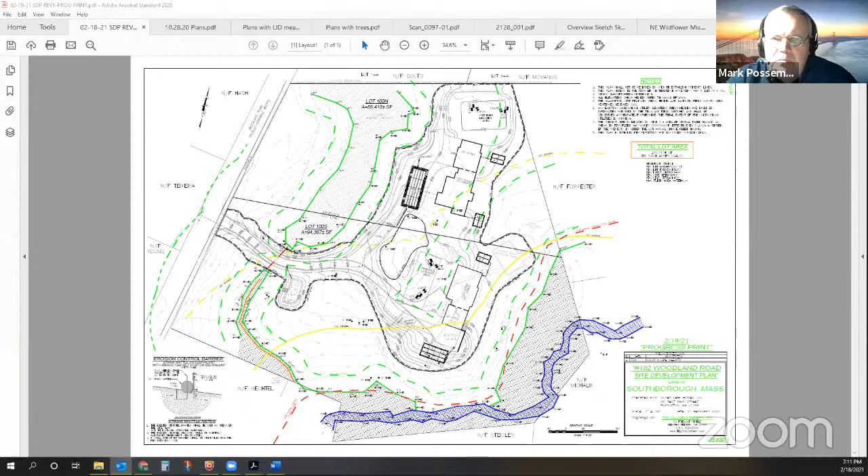Okay, thank you. At the top of the screen there are some test hole symbols, and I think it says proposed leaching area. Is that what that says? Yes.

And in front of that home box there's something rectangular in shape. Is that for stormwater? There are two stormwater recharge basins proposed. One is to the east, behind the proposed house on lot 100N. Then there's another larger recharge basin, a series of rectangles surrounded by dotted line types, that collects stormwater runoff flowing from the driveway and yard areas post-development.

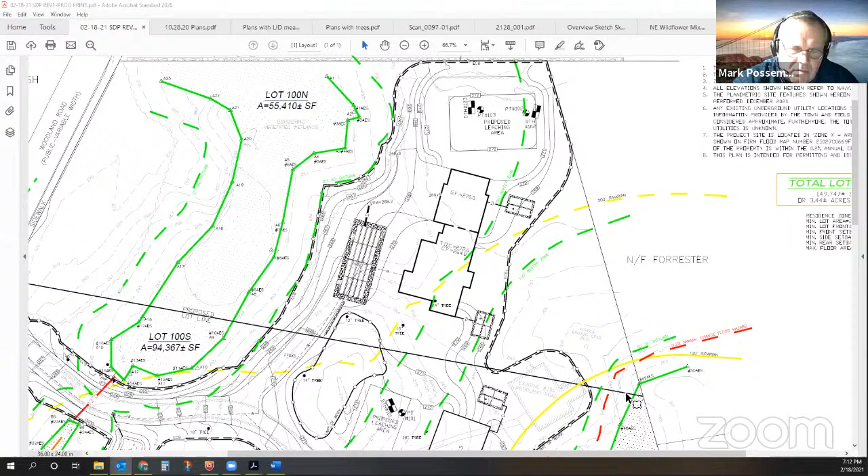Okay, and down towards the bottom left of the screen there's also some sort of stormwater feature as well. Yes, that's for the second proposed house, lot 100S for south. There are two recharge basins that serve that proposed lot. One is on the north side of the proposed house, catching a portion of the roof, and on the south side there's another recharge basin catching driveway and other portions of the proposed roof, again a series of rectangles surrounded with a dashed or dotted line type.

Okay, and for the home towards the bottom of the screen, I see that a portion of that is located in the inner riparian, the 100-foot inner riparian. That's correct, yes.

Is there any reason why you need to do that? Couldn't it be pulled out of that? It's not practical to pull it out completely. There is some wiggle room to move the house around. If you look closely at the plan, you'll see we've tried to site it and provide the infrastructure to support the house over existing developed and degraded areas on the property, and that's how we wound up with the house in that location. We're also trying to provide spacing between abutting properties and between the proposed houses.

The two proposed houses are about 60 feet apart, which exceeds the minimum lot yard setbacks, but we thought it was adequate spacing for privacy and enhancement of the property. If you look closely at the screen, underneath that southerly recharge basin there's an existing driveway and an existing garage building, which will be removed as part of the project. And those are degraded riverfront areas.

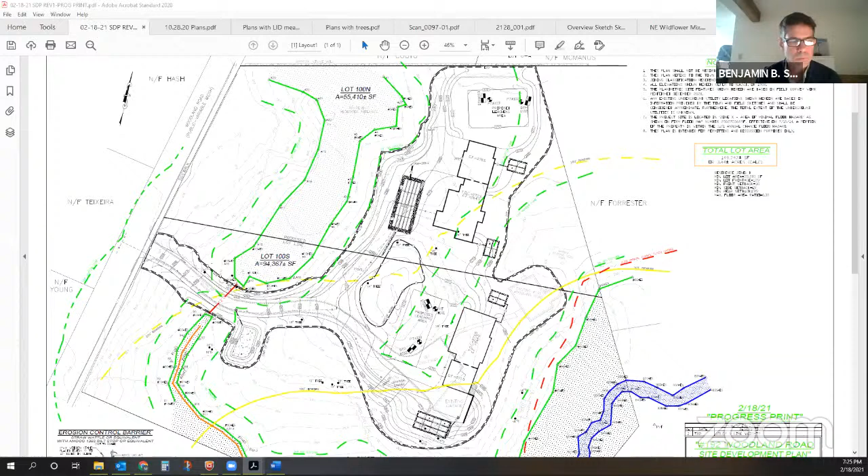Mute, Mark. Mark, you're on mute, I think you were trying to talk. Oh, thank you, I am on mute.

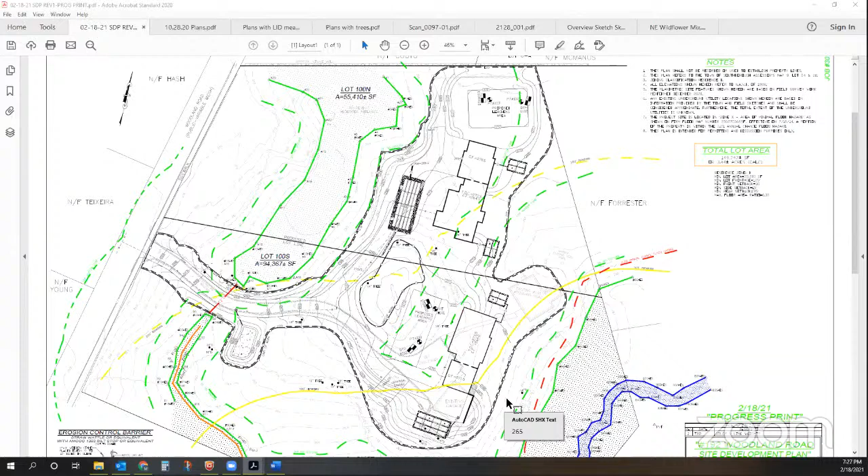And down at the lower portion of my screen, is that going to be filled in, that part of the riparian area? Yes, there's some fill proposed to get the recharge basin in.

You can see that the existing contours descend from the existing garage towards the river, and they look like they're probably 6 or 7 to 1 in slope. The recharge basin generally wants a flatter area, so I've had to play catch up a little bit with the contours to catch my 3 to 1 grade before the limit of work that's proposed.

You'll also notice that there's an approximate tree line, so this site work is being performed in an area that's already lawn, or lawn and a combination of other uses, but in general it's already in use. Right.

Just a comment on the leach field areas - I suspect this hasn't been through the Board of Health yet, right? Correct, it has not. It would be helpful, but we usually will not approve something unless the Board of Health has approved it. So if you come back again and we don't have the septic settled, we'll probably get into an obstacle. So you probably want to get that done before our next meeting if you're going to come back.

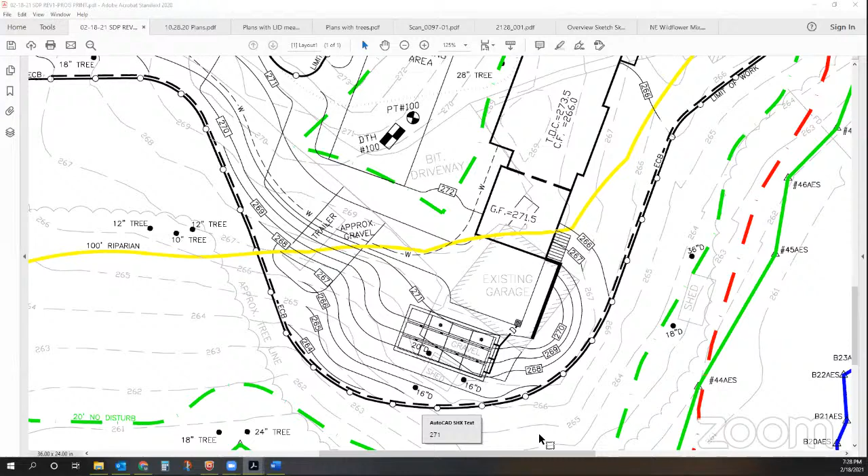Yeah, I'm pretty sure we're not going to have septic designs approved by Board of Health by the next meeting. I'm assuming your next meeting is 2 or 3 or 4 weeks away. It's in 3 weeks. Yeah, the Board of Health has been significantly backlogged on applications. We found that out in the fall.

Just to be clear, Carl, we don't - if they don't have septic approval, we don't necessarily require that for our approval. No. Should Board of Health require a change, then they would have to come back in front of us with an amendment, and we would have to consider the amendment at that point in time. Okay.

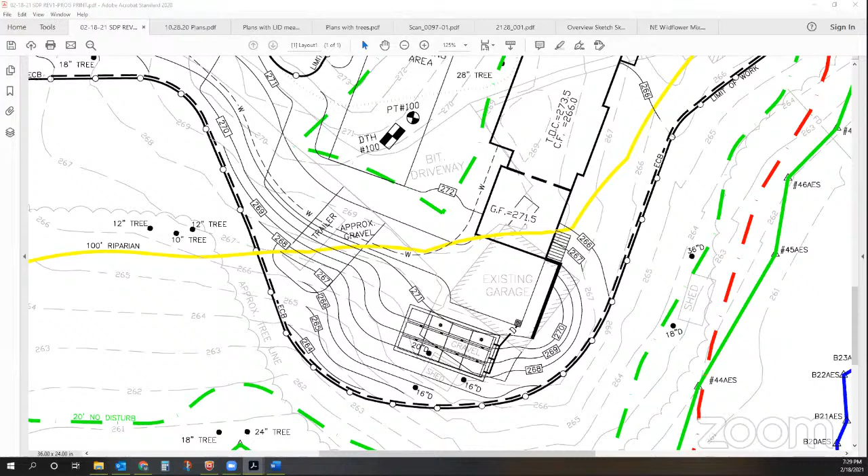Just for clarity, I can also add a little bit to that - in preparing this site grading plan, we've been conservative with all our design sizing requirements on the septic system. So it was the intent that it's probably larger than it needs to be, anticipating that we might be able to make it slightly smaller. So if we come back to conservation with a change, it would be considered insignificant.

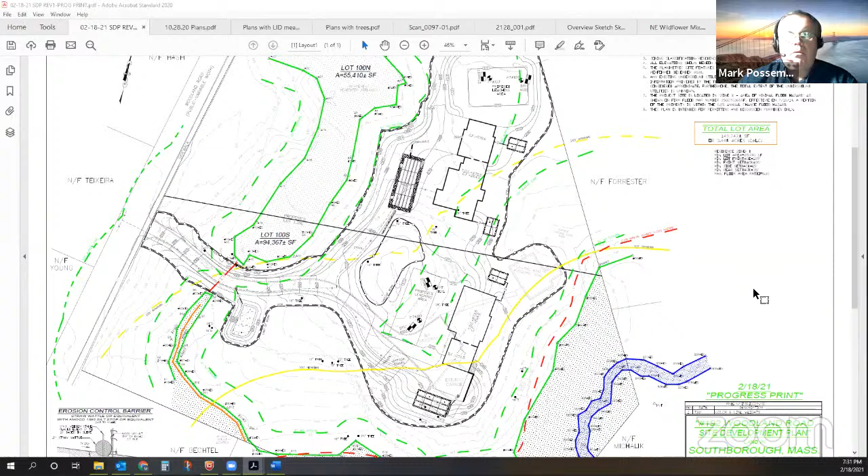Okay, any other comments, questions from commission members? Just a minor clarification on Mr. Geyer's question. For the regrading south of the driveway in that 100-foot riparian area, is the plan to remove the trees behind that tree line, or is all the work outside of the tree line?

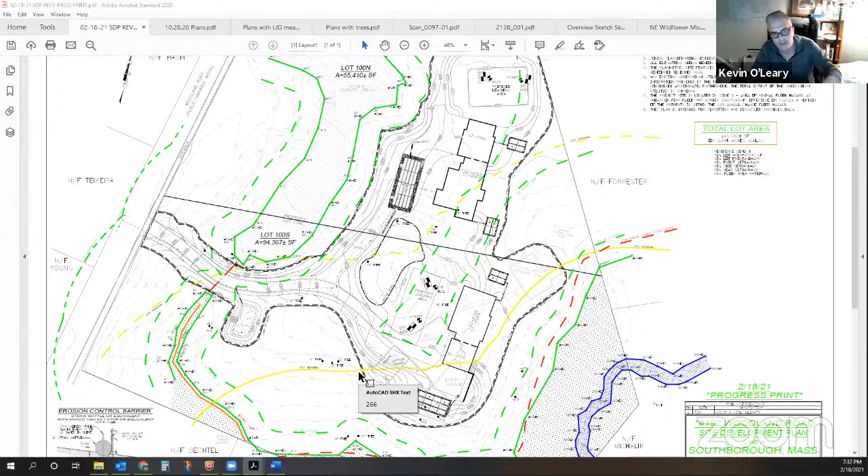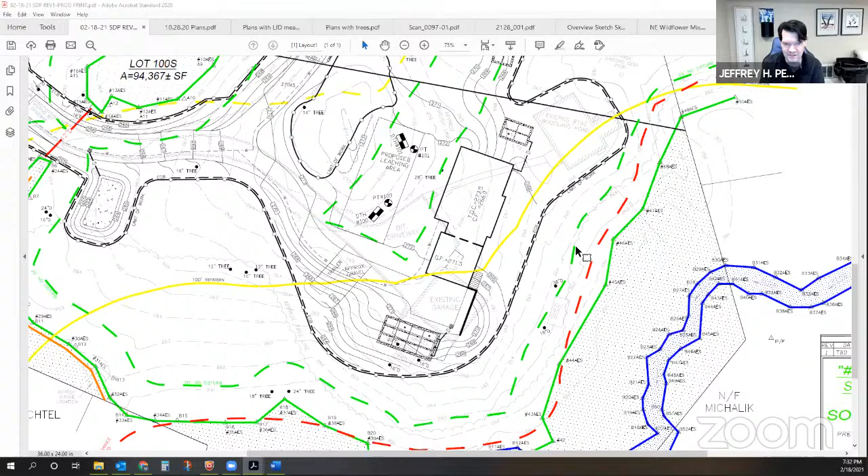The work is generally outside the tree line that's delineated beyond the limit of work. Everything within that limit of work as plotted will be altered, but outside of that is not to be touched - this existing tree line as best we could estimate it during the survey. Okay, that's what I thought, but I thought I heard different in your response to Mr. Geyer. So there would be no trees removed that are outside the limit of work, right? Right. Okay, thank you. You're welcome.

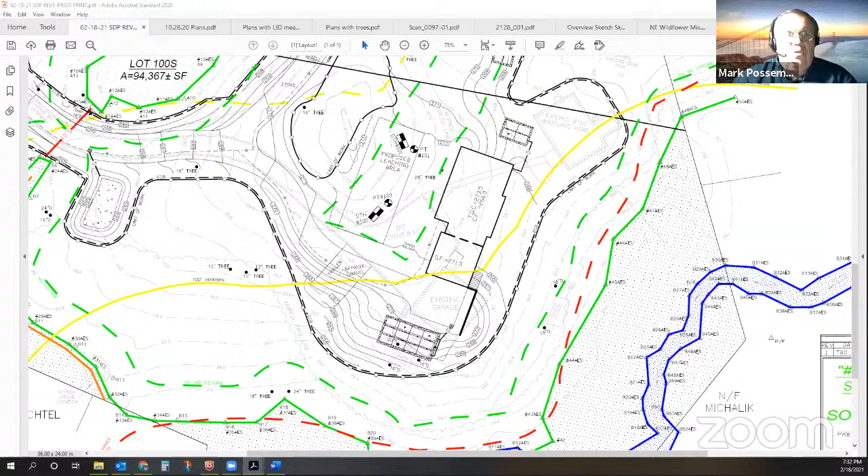Okay, if there's no other comments from commission members, I'll open it up to the public for any comments or questions. Please use the raise hand feature, it should be in the bottom of your screen. And I do not see any as of right now.

Nothing. Okay, all right, so we're continuing this until the next hearing, I assume. I looked to the applicant to see if 3 weeks is appropriate or if they need more. We'll try to make it work. I think it should be adequate.

I did have one question on Kevin's behalf. Is it appropriate for Kevin to reach out directly with your wetlands consultant to resolve any outstanding issues? Yeah, just copy me on any emails. Okay, so I'm kept informed, and then you're all set.

Yep, okay. And I guess if the weather doesn't break and we're unable to get out there to review the wetland line, then it will probably make sense to continue it beyond the next meeting so that can occur, because that'll be key to moving this forward.

All right, do I hear a motion to continue this hearing to, what's the next date, Melissa? March 11th. So moved? I hear a second. Second. Okay, all in favor by roll call vote?

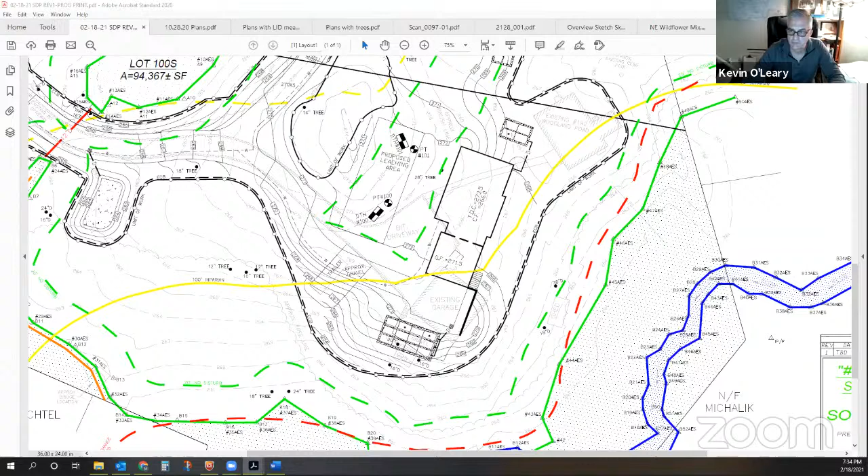Thank you very much. All right, yep, thank you. Yep, you're welcome. Have a good night. You too.

Okay, next up is the notice of intent, 5 Nathan Stone Lane, map 10, lot 100, expansion of lawn into the buffer zone. In accordance with the provisions of the Southborough Wetland Stormwater and Erosion Control Bylaws, Southborough Zoning Code Chapter 174 Section 13.5, Wetlands Protection Act Mass General Laws Chapter 131 Section 40, the Southborough Wetlands Bylaw, the Southborough Conservation Commission will hold public hearings on Thursday, February 18, 2021 at 7 p.m.

Via virtual Zoom meeting on the petition of, excuse me, for the demolition of existing buildings and construction of - well, that's the same thing. So this is, pardon me a minute. I think we have a cut and paste issue here, Melissa. Okay. Do you want, I can read it if you'd like. This is not Silverleaf Homes, correct? Correct.

This is, if it ever loads - notice of intent for 5 Nathan Stone Lane for the applicant Nick Antonopoulos, I apologize, I butchered that. The project description is expansion of the lawn into the buffer zone. Thank you. Sorry, Mark. Okay.

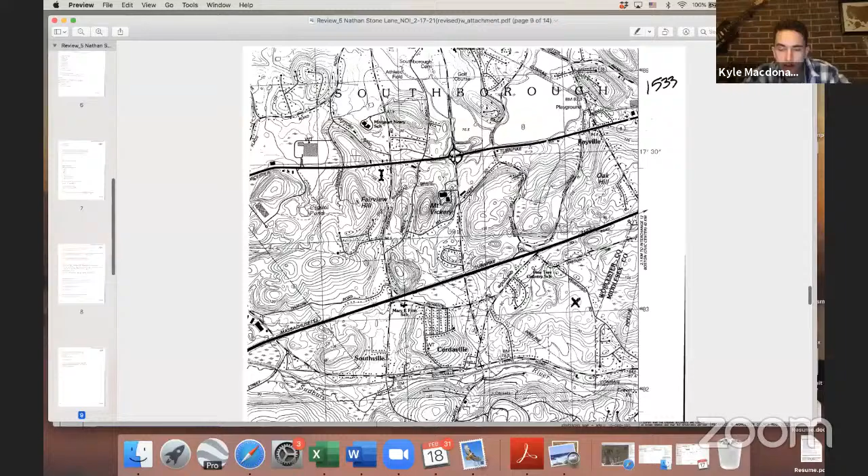I guess I'd like to take the opportunity to respond about the vernal pool a little bit. So one of the attachments to Matt's letter showed the map - let's see if I can find it. This was an attachment from the certification of the vernal pool. So this is our lot here, and this is what they've shown as the vernal pool. As he said, it's just kind of a hand sketch, probably not to the level of accuracy we could put together today. But I did look at it, and this is by no means technical or official, but if that property line is 157 feet, just visually looking at it, that certified vernal pool looks to be at least 200 feet away from the property.

So I do understand that. I looked at the aerial as well, and there are some other areas of ponded water you can see via the aerial. But I guess I would assume during the certification process for this vernal pool that the area was generally looked at. And I believe that replication area, assuming it was built around the time of the subdivision, would have been between 1994 and 1995, and the vernal pool study would have been later in '98. So my assumption would be that there would be no additional vernal pool habitat in the area if a study were to be done.

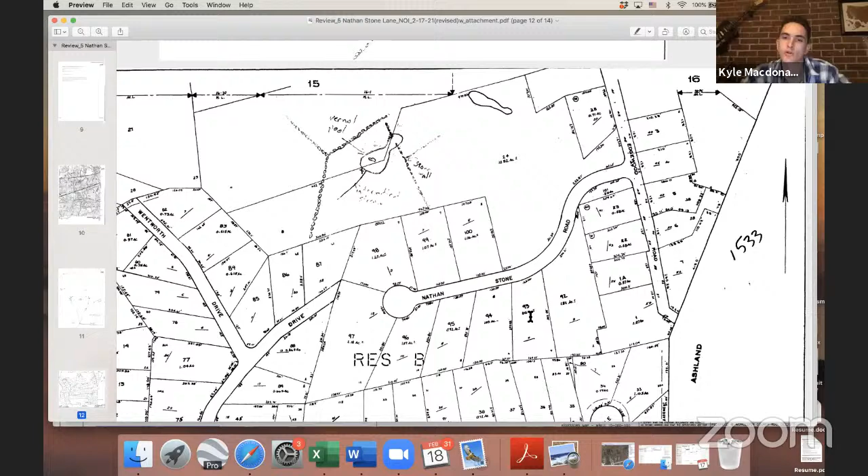And my last comment would be that, to my knowledge, the bylaw nor the Wetland Protection Act provide additional protection to vernal pools rather than just bordering vegetated wetland. And if I go back to the plan here, we're respecting the 20-foot no-disturb buffer in all locations. So my thought would be, even if there were additional vernal pools in here, what regulations would limit the amount of lawn we'd be able to have in that area, considering they're not necessarily treated differently than just a traditional wetland under the local bylaw.

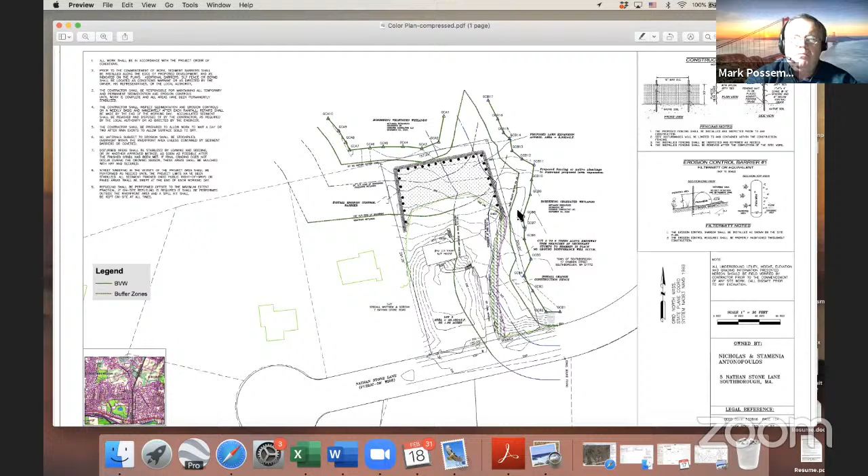Is that a question? I guess it's partially a question, partially just me getting my thoughts out there. If it's something the commission requests, we could get out there in late March, early April and determine if there are any other vernal pools out there. I guess the question would be what ramifications would that introduce to the project. Say there is a vernal pool right here, considering we are already respecting the 20-foot no-disturb. I guess the question would be what further restrictions would be placed on the lot.

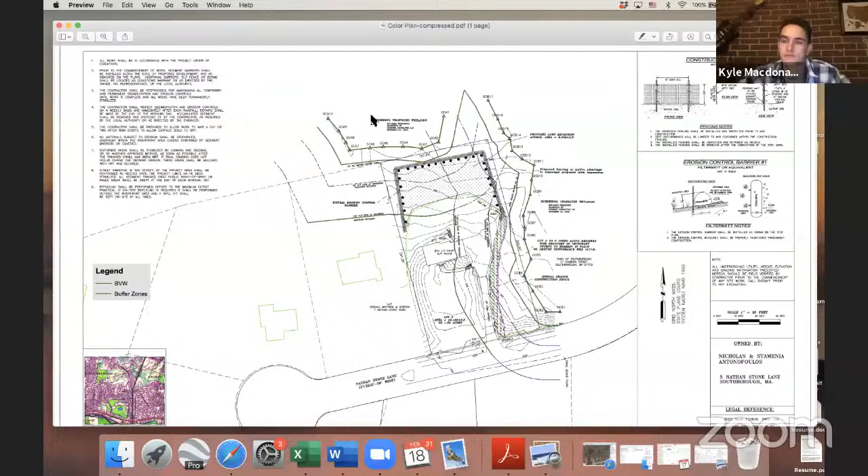The first step we have is we need to get out there and take a look at the wetland boundary and see where it is. Given the snow cover we've got, we need some of that to recede to open up the ground so it can be reviewed. So that's what's immediately in front of us.

Understood. So to that end, I'll open this up to anybody from the public that wants to comment or question. Are there any hands raised, Melissa? I do not see any hands raised. If you would like to comment, please use the raise hand feature in the lower portion of your screen.

I do not see any. Okay, all right, so we'll go ahead and continue this to the next hearing and hope the snow has some melting between now and then, and we're able to get out there and take a look at it. Do I hear a motion to continue to the next meeting, which is March 11th?

So moved. All right, is there a second? Second? Okay, all in favor by roll call vote? Watson, yes. Smith, yes. Pete, yes. Guyer, yes. Gregory, yes. Possemato, yes. All right, thank you. Thank you.

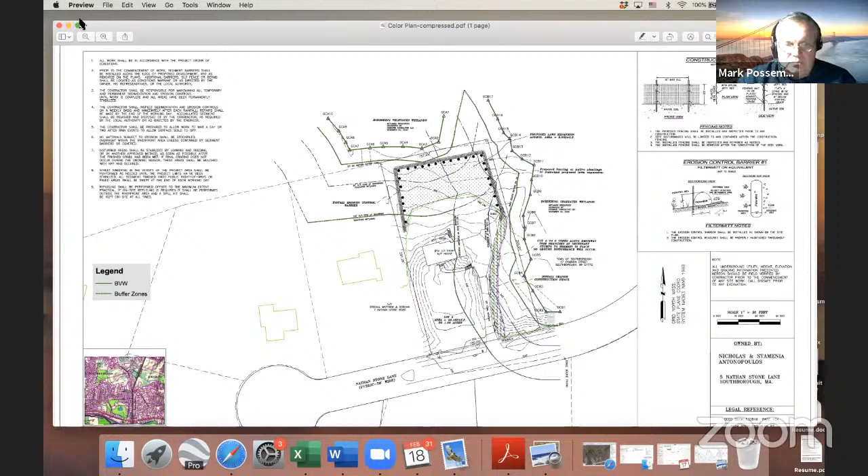Okay, next up, 730 Ruby Estates, NOI and SMP. In accordance with the Wetlands Protection Act, Mass General Laws Chapter 131 Section 40, Southborough Wetlands Bylaw and Southborough Stormwater Erosion Control Bylaw, the Southborough Conservation Commission will conduct continued public hearings on Thursday, February 18th, 2021 at 7:30 p.m. via virtual Zoom meeting. The commission will consider notice of intents and a stormwater management permit for a project located at 96 Mount Vickery Road, to be known as Ruby Estates, map 28, lot 18, for the applicant Bartolini Properties. The project description is construction of a roadway and associated stormwater features for a 6-lot residential subdivision. These public hearings are being held concurrently.

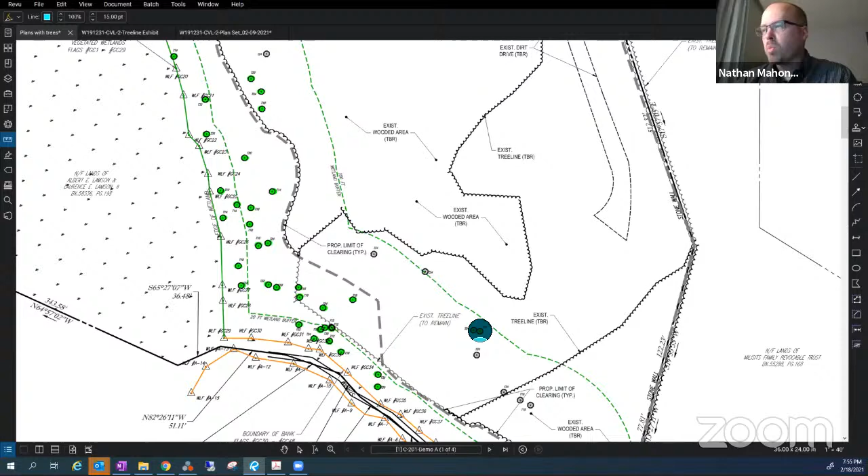Relative to the disturbance within the 100-foot buffer zone, the houses on each lot have been pushed up to the front yard setback required under zoning, so all the homes have been pushed as close to the street as possible. Lots 1, 2, and 3, the first three on the plan here,

have had 10-foot foundations, non-standard foundations, implemented into the design in order to reduce the fill required for those three lots, as well as to pull in the grading on the back of the lots and reduce the amount of disturbance within the buffer zone.

Lots 4 and 5 have also been pulled back to reduce the amount of disturbance in the buffer zone in the lower area. Lot 5 was a little more restricted, obviously, because that's where the stormwater basin is located. The changes provide the maximum amount of retained buffer zone while trying to maintain a usable yard and a usable product for each lot and the future homeowners.

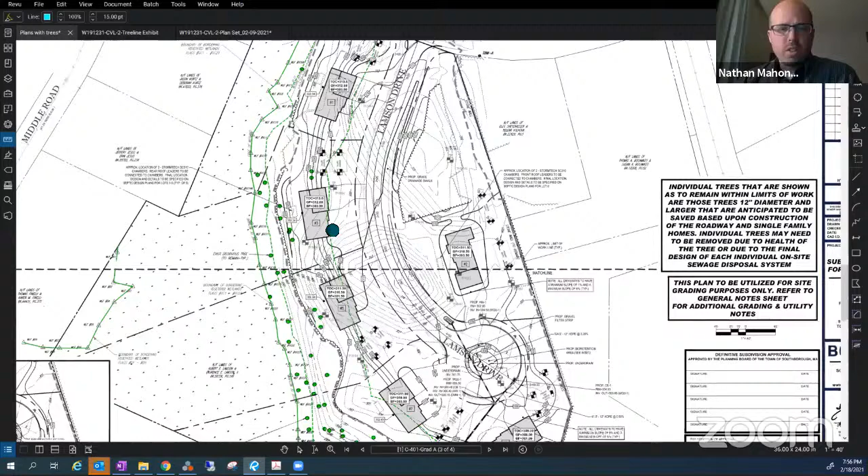All in all, the changes reduce the buffer zone impact by around 10,000 square feet, and we're currently leaving about 41% of the buffer zone in its current state. This is an increase from the 32% presented at the last meeting.

The project has also incorporated some LID techniques that resulted from the planning board process and planning board comments. I can run through any of them in detail, or answer questions, but in general they include a roadside swale in lieu of curbing to direct stormwater from the roadway down to

the infiltration basin. There's a bioretention area that's been added to the center of the cul-de-sac to provide additional vegetative treatment of runoff as well as to reduce impervious cover.

And each of the lots has incorporated underground storm tech chambers to capture the rooftop runoff from approximately half of the roof area for the 1-inch storm event, and put that in the ground to provide more decentralized infiltration throughout the site. The stormwater calcs submitted account for all of these,

and an updated operation and maintenance plan has been provided that reflects these new features. So those are fully accounted for in the operation and maintenance plan.

Lastly, relative to plan changes, there were some specific comments from the commission members at the last meeting relative to the location of the sediment basin and how and where that was going to be sited. Those have been addressed, so they're relocated outside the footprint of the infiltration basin at

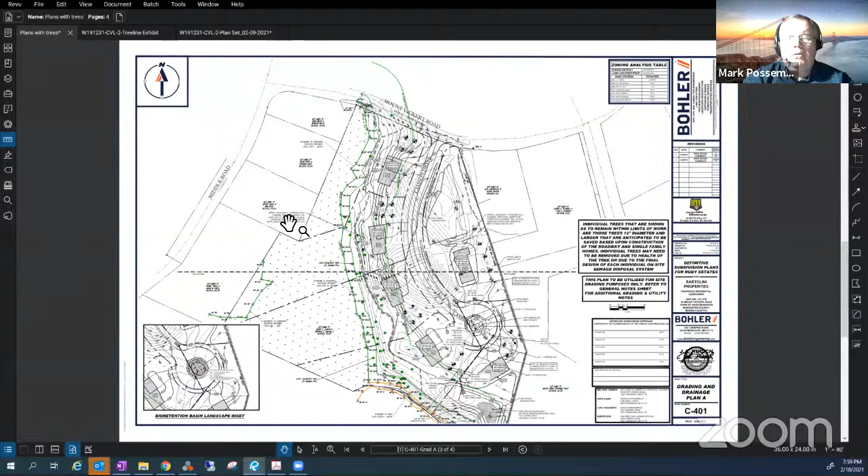All right, thank you. Mr. Farrell from Lucas Environmental, you have any commentary here?

Yeah, just a few things. I was able to take a look through the plans. I did visit the site this morning just to take a look at the tree survey and some of the other portions of the site, best I could with the snow out there, but the wetland boundary was all previously approved.

I think the tree survey, as far as showing the hardwood trees, was fine. I just want to bring to the commission's attention that there are numerous other trees out there, primarily pines and some firs. I want to make sure the commission doesn't look at this plan, see the little green and gray dots, and think those are the only trees out there. As we discussed at the last meeting, the trees likely to be of any value for preservation are going to be the hardwoods.

The pines that are out there are fairly significant. A lot of them are at least 18 to potentially 24 inches in diameter. So there's some good size trees out there through the buffer zone as well, but understanding that when you start thinning out the forest, the pines are unlikely to survive long term. I just wanted to point that out.

A couple other comments on the response from Bohler. One question I had, on the drainage, with the improvements you've made with the low impact design, the infiltration for the individual homes and the basin within the cul-de-sac - I know you didn't include that in the calculations with any intention of reducing the size of the main basin at the southern portion of the site. But my question is, is it to the point now where you feel it's over-designed at all, where that basin could be smaller, just thinking about further reducing impacts within the buffer zone?

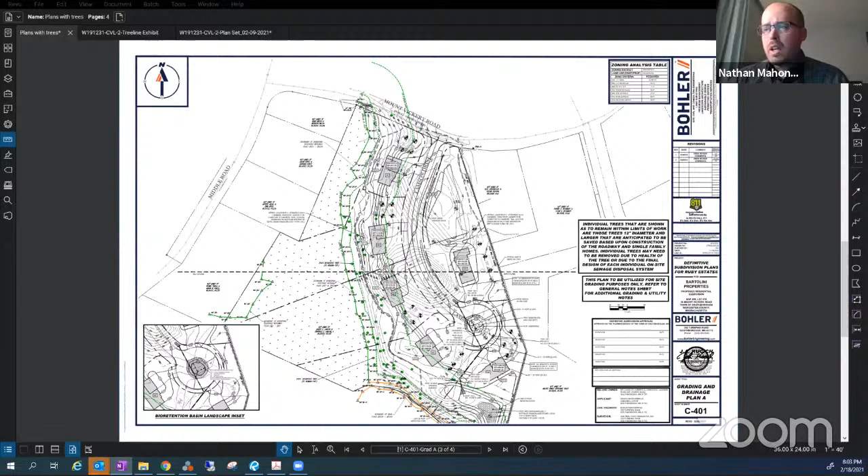Relative to the pines, bear with me a moment. We actually did locate the pines as well. I know the focus at the last meeting was the deciduous type of trees, the legacy ones with the shade and so forth. The discussion was that individual conifers have a hard time really surviving after it's thinned out, because of the type of root system - it's shallow, spreads out like a plate, so they're subject to blowdown if you don't have a good group of pines or conifers in one area. But we did locate the conifers just so the applicant had them.

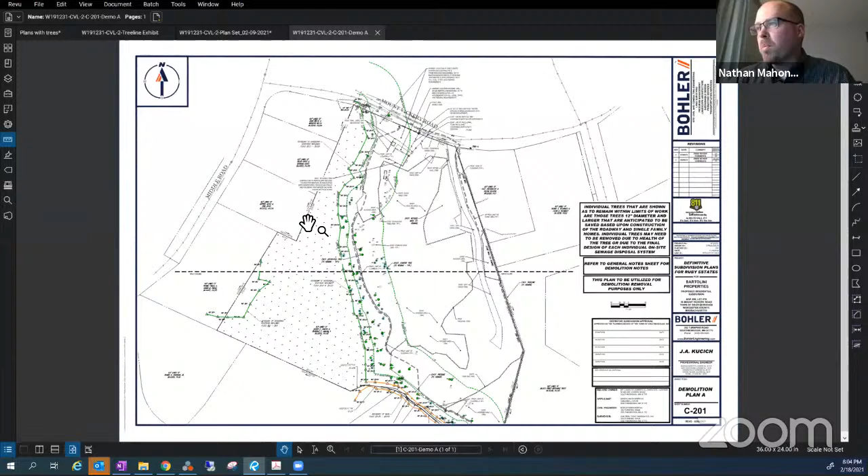This here is an updated version of the buffer zone plan that I just showed. The deciduous trees are still shown in green. The conifers have been added in blue. The conifers to be removed are the same symbol, but just grayed out in this area.

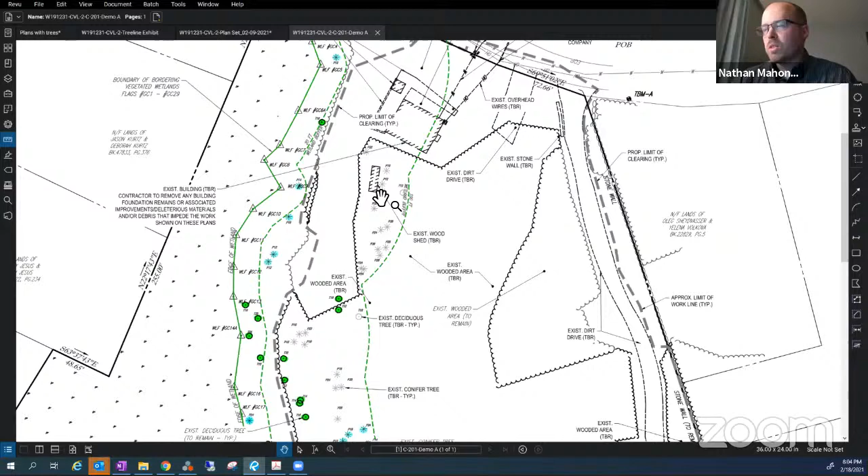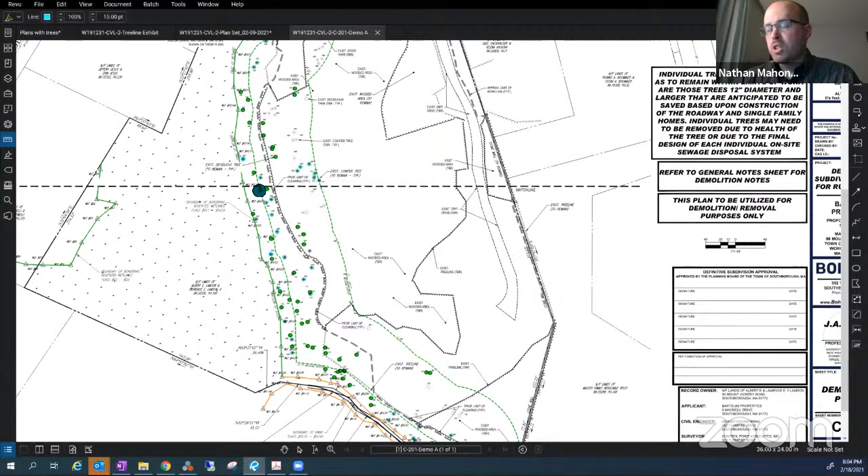Relative to what's in the buffer zone, the trees are really spread out for the most part. There's a section near the existing shed, and another section in between lots 2 and 3. The remaining 12-inch diameter and larger trees are closer to the wetland, between the 20-foot buffer and the exterior limit of work. Looking at all trees in total, both coniferous and deciduous, we're saving approximately 109 out of 151 trees, about 72% of the total trees 12-inch in diameter within the buffer zone.

The main focus at the last meeting was just discussion of the deciduous trees, but while we were out there, we felt it pertinent to get the coniferous as well, and evaluate those to make sure we were taking them into account on the design.

Okay, thanks, Nathan. You're welcome.

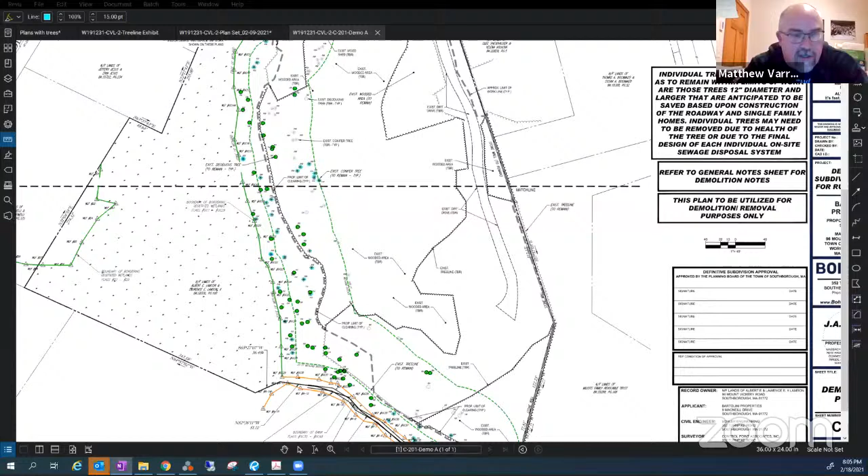Couple other questions. Can you bring up the grading plan again? There were a couple spots. I think one was behind lot 4 where there seemed to be some grading shown that maybe was unnecessary. Zoom in on 4, there was a proposed grade line. Sorry, I guess it's number 5 maybe. 5 is the basin, 4 is here, go up the next one. Yeah, see that grade line right at the erosion control proposed area. I wasn't sure what that was about, seemed kind of random.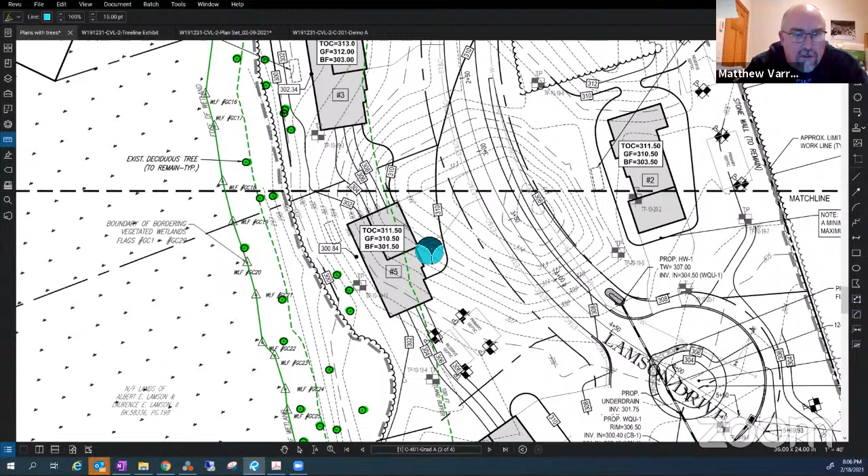So the house elevation, when you come down to the back for a walkout, the back elevation is around 301. This is just to catch up to existing grade—we're right at 300 there. That's really just to provide positive pitch away from the foundation. It's the minimum distance we need to get away from the house box before we're at existing grade and able to pitch water away from the foundation.

So where we have those 3 trees there, presumably the goal is to preserve those. Correct—that will potentially take some careful grading in that area to make sure those trees are preserved. They're about elevation 301, which is again about the back of the building, so we'd be grading down probably 6 inches or less in those areas. But as it's being fine graded, they'll have to take some care working around the base of those trees. The plans do call out for tree protection fencing around the trees to remain, so they can be protected and maintained during construction.

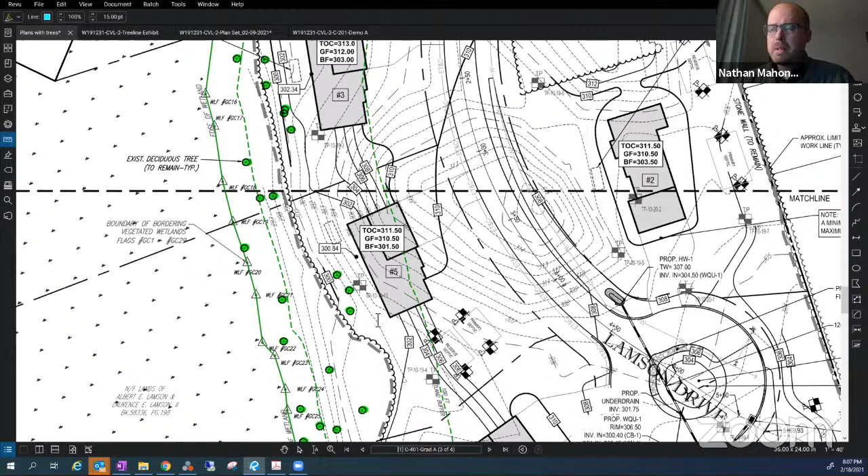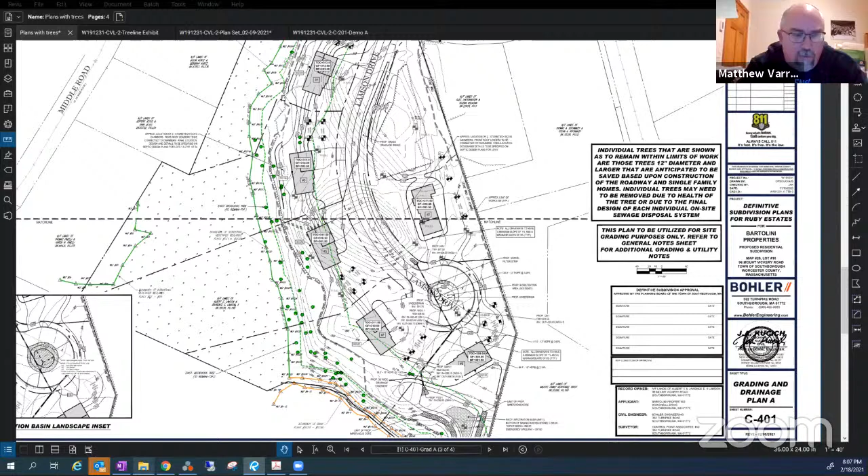And then the only other question I had was about using the conservation wildlife seed mix—I couldn't see in the plan if there was a landscape plan that showed exactly where that seed mix would be used. There was a separate exhibit submitted with it, I'll pop that up here as well. Again, it's on the outside of the site.

Shown on this plan here, this is the grading plan with the wildlife seed mix shown in green. The areas where we're tighter on the back of the yards now, because of the reduced fill and reduced slopes, and we're providing an additional preserved buffer beyond the 20-foot we originally targeted, will be regular lawn and landscape up to the tree line. The areas in green near the front and back of the site are disturbed areas between the basin and the tree line, and other adjacent areas where there was some existing disturbance, where we felt we could seed it and provide additional enhancement to that maintained buffer zone.

And the same thing up front here—this is all existing area currently used under the former home and so forth, that could use some additional seeding in that area, letting it establish and come back to more of a natural wildlife type of state within the buffer zone. So those were really the 2 areas we targeted—around 11,000 square feet of total buffer zone that we'd be looking at seeding with that mix.

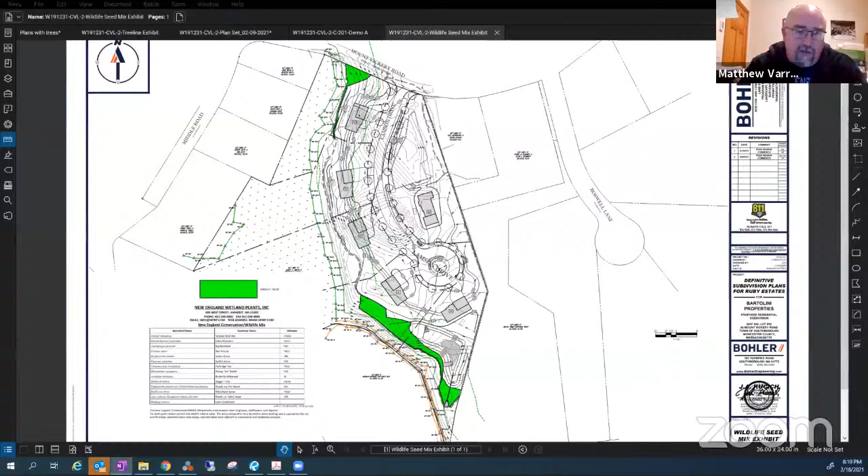So then I guess my last comment, this would be more for the commission, or I guess for you, Nathan. I don't know if you're proposing any sort of signage, or just throwing it out there for the commission to consider. I applaud the applicant, I think this is a much better plan than we last saw. But with everything at a less steep slope now, which is good, I think it potentially lends itself more to lawn creep. So there may be a need for signage or something to delineate where that permanent limit of work is, so future homeowners understand their lawn is what it is and not to be expanded closer to the wetland. That was all I had.

All right, thanks, Matt. Any other questions, comments from conservation members?

Yes, Mr. Smith. Yeah, first, as Matt said, I just want to acknowledge that clearly the applicant listened to our comments and took it seriously. In particular, the changes pulling the houses further away from the wetland and making the foundation changes to lessen the grading impact behind the houses, I think is a great change to the plans. I'm really glad to see it.

The only question I had was regarding the rooftop infiltration, and this is just a technical question. Are you proposing 2 of the StormTech chambers for each rooftop? There are 2 of them called out in the remaining 4. I just want to make sure, is that the setup?

Yeah, it's the same size system per lot. So each lot will have that 2-chamber system. Okay.

I see in the call out the details of those you're anticipating to provide on the septic plans. Correct. Each house lot's going to need its own detailed septic design plans showing the grading of the lot, the home, and obviously all the septic components. Those systems would be detailed out on there with cross-sectional details of the underground system as well as elevations of the systems themselves.

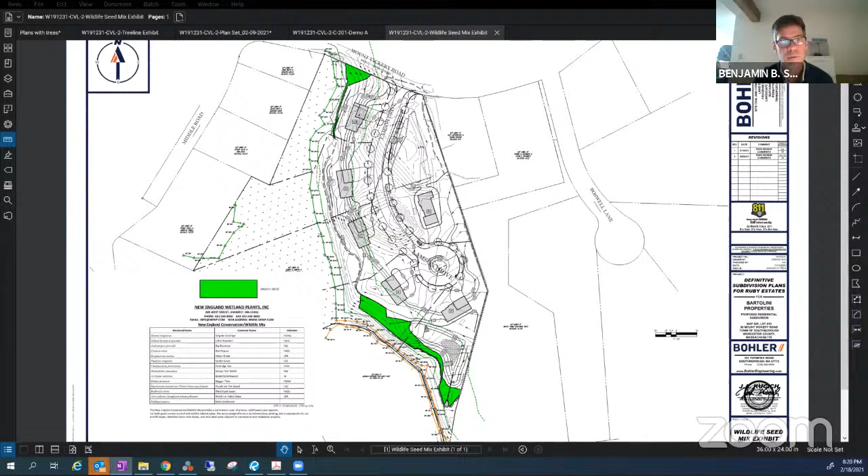I'm looking for other recommendations from the commission with respect to this project. I'm fine with what you proposed. I think we can talk through the conditions and whatever we're adding to the standard conditions, and that would give us enough information to make a vote on it and give Melissa what she needs to get it typed up for our signature. We would all have to just pop in to sign before the next meeting, but we've done that before.

You don't even need to sign them. We have electronic signatures, we passed that. That's right, forgot all about it. Virtual, never have to see you again signature. Yep. So yeah, it's not the signature that's the problem, it's just the 21 days of physically getting it to them. If Melissa's good with it, I'm good with it.

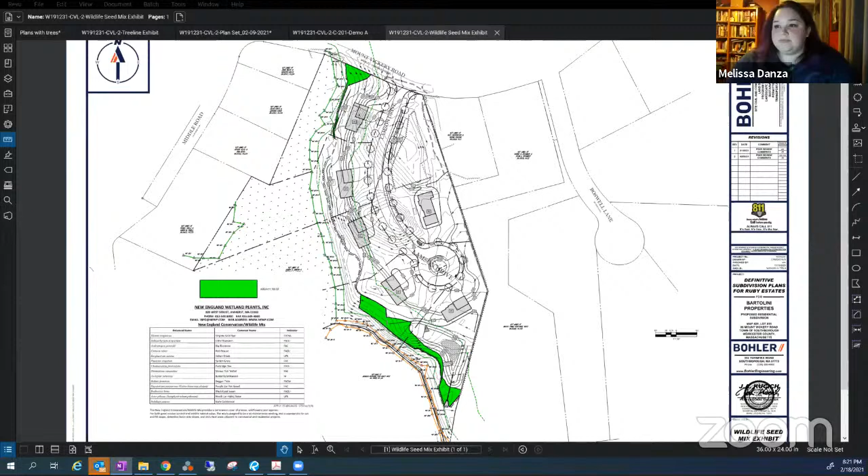Okay, so do I hear a motion to close, which one should we do first, Melissa? The stormwater or the NOI? It really doesn't matter. Okay, do I hear a motion to close the stormwater management permit hearing? So moved. Is there a second? Second. All in favor via roll call vote? Watson, yes. Smith, yes. Pete, yes. Guyer, yes. Gregory, yes. Passamano, yes.

Do I hear a motion to close the notice of intent? There are 6 of them, numbered 290-1067 through 1072.

I didn't have that in my notes. So do I hear a motion to close the NOIs for the 6 lots that Melissa just mentioned? So moved. Is there a second? Second. Okay, do I hear a vote by roll call vote?

Watson, yes. Smith, yes. Pete, yes. Guyer, yes. Gregory, yes. Passamano, yes.

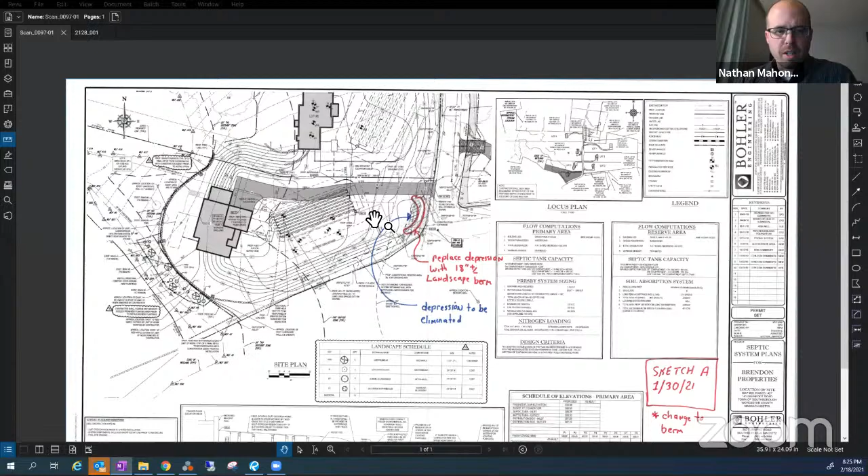So in the spirit of what was really approved under the original plans, the homeowner is going to extend the berm a little further towards the driveway to build up this area and allow it to hold back, detain, and infiltrate any water running down to that low area, in lieu of putting in the depression. From an engineering standpoint, viewing it on site and the way water runs in this area now, we feel it's going to act as a replacement for that infiltration area.

It's noted that since this vegetation's been put in and the lawn's been seeded, the vegetation is doing a great job of taking up that water into the ground and into the root system. The intent would be to extend this berm, and it would be reflected on the as-built plan for the certificate of compliance, noted and discussed in that request for documentation.

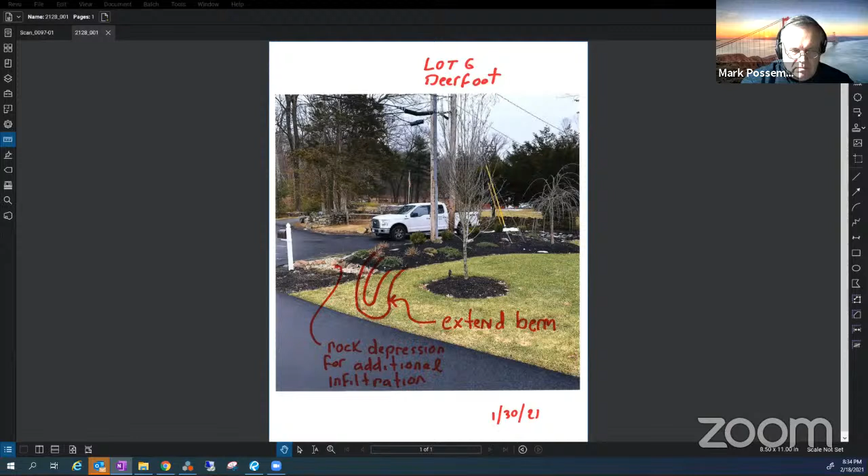All right, so I'd be looking for a motion to approve this proposed extended berm. So moved. Is there a second? Second. Okay, all in favor via roll call vote? Then, Yes. Smith, Yes. Pete, Yes. Guyer, Yes. Gregory, Yes. Possemato, Yes. All right, thank you.

All right, thank you for your time.

Okay, the discussion on the invasive mitigation at 6 Newton Street has been continued, so we will not be talking about that this evening.

Next item was 84 Main Street, update from the owner and discussion of status. Yes, let me move in. I see both John Delli and Peter. So the commission asked them to give an update on some of the things they had been seeing and follow up on some past violations and issues. They agreed to come to this meeting to provide that update and have some rough sketches to show the commission. Okay.

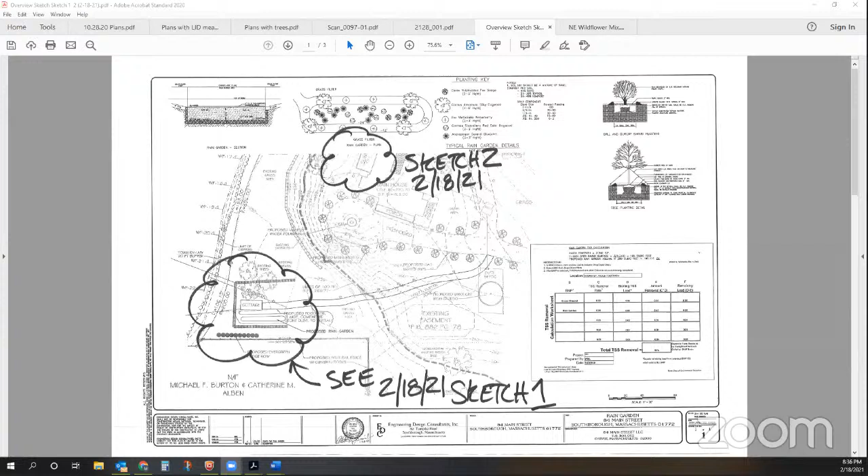It's Peter Bemis here. John, I think you're probably on mute, but I know John's here as well, and I did email Melissa a couple of sketches just so there was at least a talking point for this. Do you mind bringing those up, Melissa? Peter, you might want to adjust your camera down a little bit, we can just see your eyes and forehead. I'm sorry, there you go, thank you, I wasn't looking at what I look like. Put your camera back to where it was, only kidding. Thank you, Mark. All right, John, you want to speak first? Go right ahead, I'm just trying to get on there with my picture. I don't know, but I guess you don't need to look at me. What's the trick to get on there with the picture, Melissa? There should be, it'll ping you maybe now to start. I'll start my camera. There we go. Yep. Yes, there you go. Okay. I've only done this unassisted twice, usually I have somebody helping me because I'm a in-person guy, I guess. Well, this is all I do now, John. I know, the whole world is just crazy.

Before we get started, I just wanted to give you, I haven't seen you in so long, an update of where the overall development is in the scope of things, if that's helpful. Is that okay, Mr. Chairman? Just a brief update. Yes, please.

Okay. So the entire 5 acre lot, it's 4.9 acres, we'll call it 5, is completely stabilized and vegetated. The pond out front is working exactly how we had hoped. I plan on having substantial completion of everything sometime in June, that would be the wrap up of certainly everything on the exterior. I'm still finishing a few things on the interior. I just wanted you to know that everything is coming along. We have to do the final coat on the driveway, and Peter's going to go through a few things tonight on the slopes and on the rain gardens and a few other items.

But I just wanted you to know that pond we created there is working like a charm, and it's really providing nice site retention and cleaning the water. I want the board to know that there hasn't been one pebble that's left that property, one teaspoon of silt into that waterway, the entire time I've been involved. Especially now, because it's all, we still have the wattles and everything, but it's all vegetated. I hope you realize that, I'm sure you drive by and notice, but I just wanted to be sure you knew. I took great care of that. I have hired, they've been there, there'll be the 4th trip this year, tree specialists out of Hopkinton who do a lot of the Olmsted properties throughout Eastern Mass and in Boston. They're coming back again to do some additional tree pruning, and I've put an awful lot of money into the monumental trees.

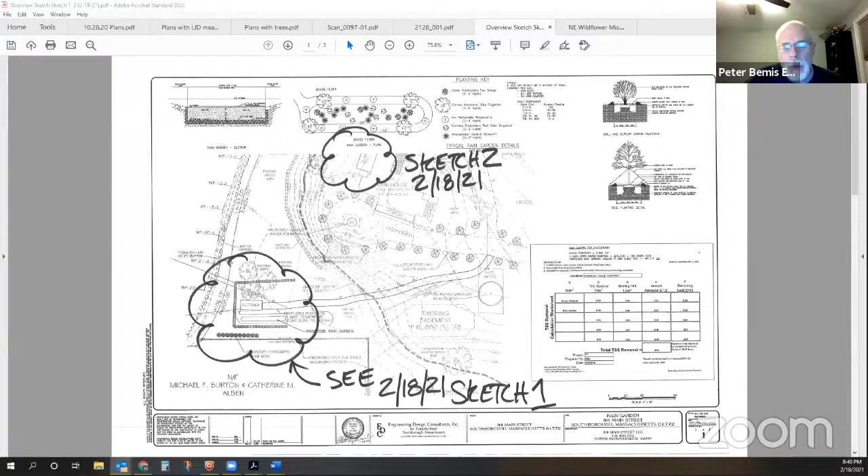When this was initially submitted, we were using the rain garden the way the previous consultant had suggested it. We just refined a number of details with our plan. Sketch 2 will bring you to the other side of the property, and there's a second drawing we'd done for a well improvement, but I don't have all the pieces on one piece of paper.

So for sketch 1 - thank you, Melissa - I wanted to bring to your attention that we had proposed a filter strip to gather water coming off the driveway. We had actually done an as-built survey, and John had just approached me the other day and said he thought it would be better suited if the rain garden was on the west side of the cottage.

We had proposed a smaller version of the rain garden on the east side, where he had proposed some plantings. So the plantings would still stay. It makes sense to probably keep the filter strip there to gather the water, but the rain garden may be better suited on the west side. I was planning on doing a site walk with Melissa prior to construction so we'd both concur, establish the limits of the rain garden, follow the same details, make sure the same volumes are present, but lay it out so it works properly.

That's the main thing - the walk hadn't been built when we did our initial work here. The cottage certainly was there, so we kind of pieced in where those things would go. Now those improvements are there, so we can make sure we're expanding the rain garden as large as possible while also accommodating the improvements that are there.

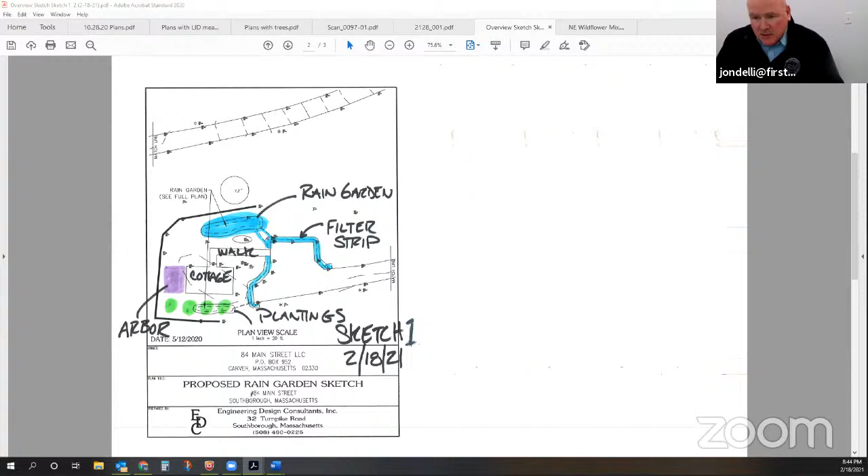That's just as you walk out of the cottage, a little piece. I thought it would be nice if you go along with it. Anyway, it's up there, you can see the pieces. It's not erected, it's on a pallet, waiting for approval this spring. But that's the background of it. It is a period piece, a very special piece. But anyway, go ahead, Peter.

Then, so in the second sketch, I'll outline and I'll come back to the pergola. On sketch 2, I've identified there's a stone and batten board utility building going in to the left of the driveway as you're coming up at Deerfoot, with some associated mechanical systems. One is the infrastructure to support the well that was installed, which supplements water in the pond during the dry season.

And then there's also a transformer that was installed, and a gen set for the building here. There's an existing overhead wire that comes in off the utility pole. Again, to bring this more into the period, that overhead wire would be eliminated, and they're going to run underground service to the carriage house. That's all done, Peter, and that's done.

So when the underground utilities are put in, I worked with a power company. They have very specific requirements. That particular transformer you see there has a containment pad that had to be built around it because of my retention, or my enhancement of the pond I created. So that was required because it's near this water body. That's done, and it's going to be fully vegetated around, so you're not going to see it. It's going to have evergreen trees around it, which is allowed.

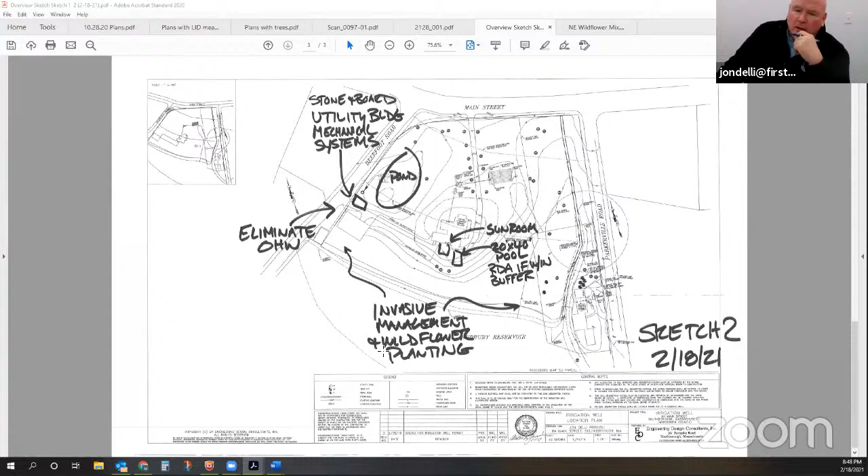So we'll do the RDA, and then that would be the other opportunity to address the pergola at the cottage, because I don't expect to just go do that. I would give you a plan and show you the detail of it. John was trying to describe it to me, and I really didn't know its exact dimensions. I just know it's going to be in the same relationship as the cottage itself as far as its width, and I didn't know how far off the back of the building it would extend. We thought about 10 feet, but I'll give you that exact detail.

So I'm not expecting to just get that approved. I just want you to know these are the pending items, other than the one we've discussed before, which is the invasive management along the bank, which this plan is also identifying. And then the wildflower planting would be done again as soon as this weather breaks. We'd want to do that pretty close to the recession of the snow. Even if the ground's still frozen to some extent, it would be a good time.

I know Russell has had experience planting wildflower seed. I didn't, so I did some research, and there were kind of two periods of time for doing that, and the more preferred was that period in the spring while the ground was at freeze-thaw - that was the best opportunity to do it.

So we would start that, and I wasn't going to start that work until I walked the site with Melissa, so that we could determine the peel back edge for the riprap, and then establish the limit of the wildflower mix. Originally we were talking on the order of 8 feet, and we've talked about maybe doubling that to 15, 16 feet, so that there's a nice swath of wildflower growth along the edge of the embankment, which is what you folks are looking for.

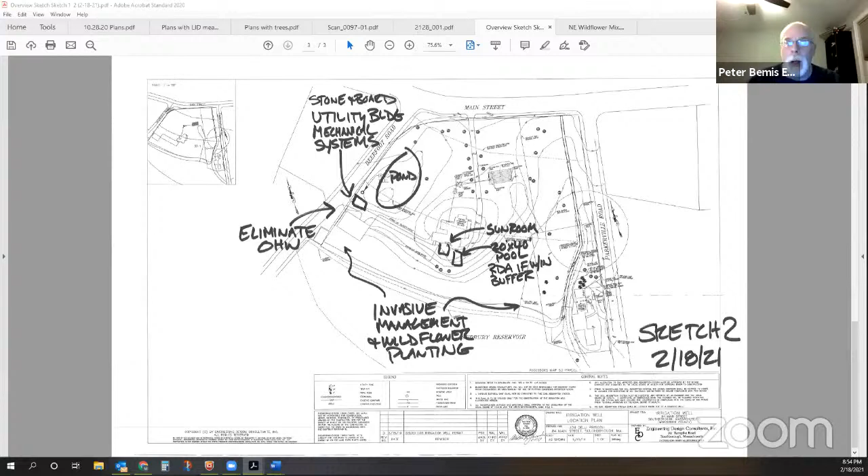We will do so, and then I will follow up with her. If any commission members want to attend and have a site visit, we could schedule that. I would hope that we'd have things ready for you for the next meeting, so three weeks from now, that's what I had said to Melissa would be my goal. I just don't want to submit something I can't give you real, on the ground, field information. I don't want to wing it. I want it to be real.

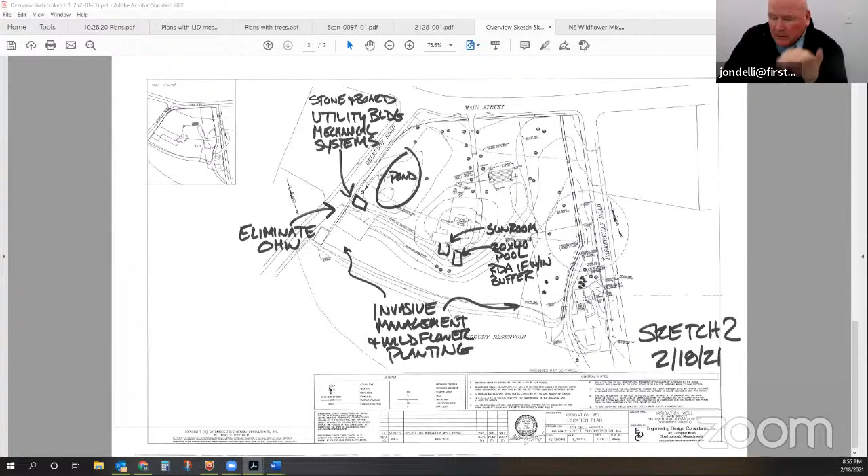Also, Peter, we got to be very careful there, because there's no erosion right now, so I don't want to be in there when it's either going to be frozen or dry, one or the other. I'm not going to go in there and destroy the grading, make a big mess there. Whatever we're trying to accomplish, by trimming back a little bit of the rock here or there or whatever it is, you don't want to make a big mess. Right now, what's there is verbatim what was put there by the Commonwealth of Massachusetts.

Understood, I understand you had some dealings with them. I think our focus here is what was approved on the notice of intent, so we have to look at it through that lens. That's our jurisdiction and our role.

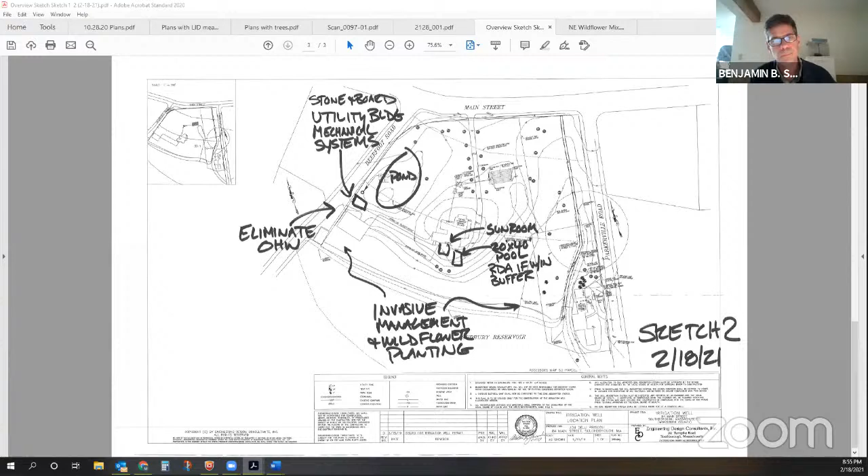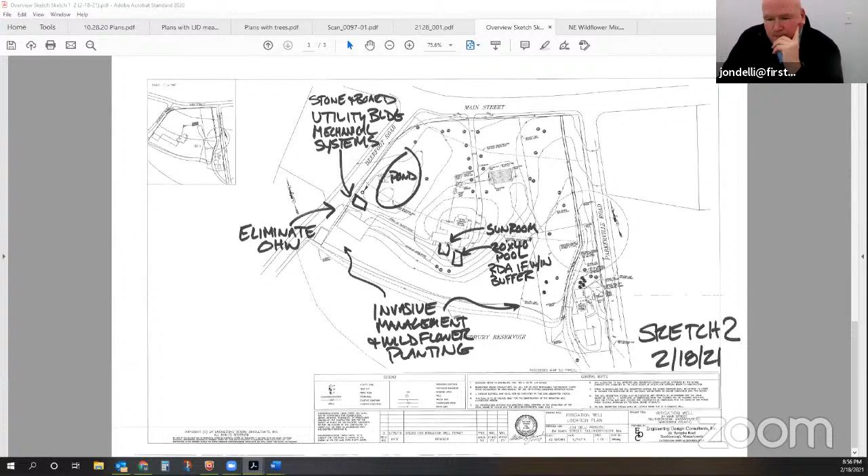Okay, thank you. Any other comments, questions? The generator, what is the fuel for the generator, and is it stored on site? Yep, it's underneath the generator. It's number 2 diesel. The rest of the site is all propane.

And is that outside the buffer zone? The pond is not in the buffer zone, it was created as a landscape feature, so the answer to your question is yes. But all the electrical stuff, that's all outside the buffer zone. All the electrical and the generator and all that, it's outside the buffer zone? Yeah.

So any other questions or comments? I'm scanning through here. I don't see any. All right, well, thank you for the update. You're welcome, thank you, appreciate that.

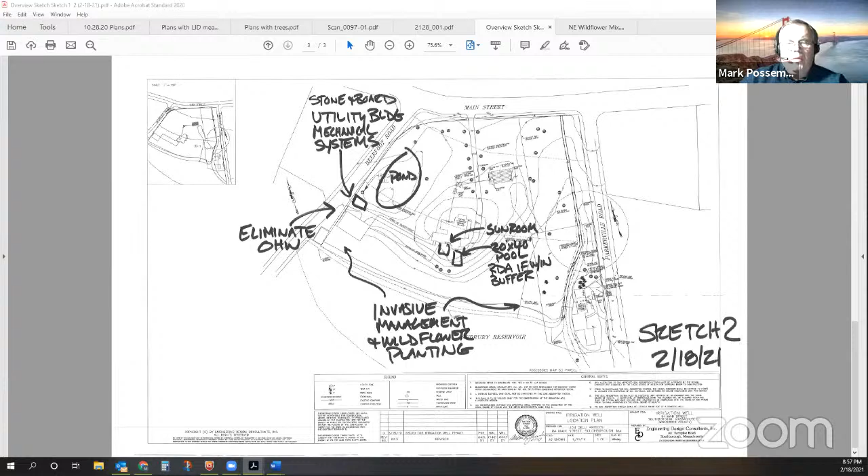So will you be back in front of us for the RDA next meeting, or? I hope so. I know I have a filing deadline, so I'll try to satisfy that.

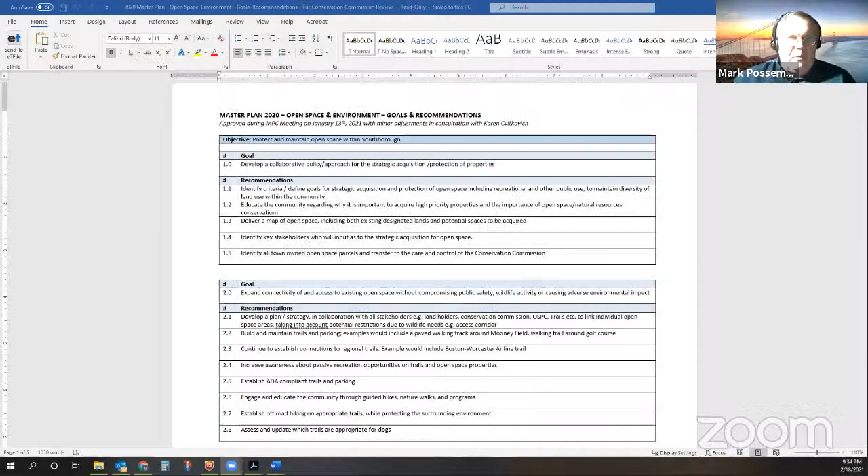I don't think there's anything else to update you guys on in the meantime. We have a couple new applications in the next meeting. I think I have 2 so far, but the deadline's tomorrow, so we'll see where that gets us.

The exciting time. So I'm sorry I was late, I'll just fill it in. I'm actually in New Hampshire right now, and we were all set to be on time to come back for 7. We've been hiking today. Unfortunately early in the day, Keith had a bit of a fall and ended up with a bloody cut nose, which delayed us by about half an hour while we made sure he was okay and could get down safely. But he's fine.

Where did you hike, Judith? Today we did Madison and Adams, 10 miles, 5,000 feet of elevation gain. We couldn't have asked for better conditions. They had about 2 or 3 inches of fresh snow, but it had slightly thawed, so the top of the snow was really kind of crunchy, pretty easy to move around. There's a lot of snow up there, and no wind, absolutely zero wind, which is just incredible to hike at those summits and not get any wind.

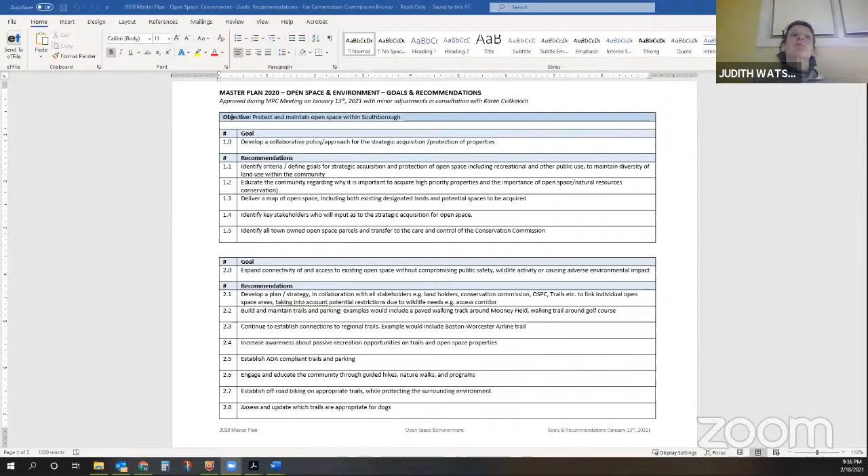Are you in with the group trying to do so many summits? I forget what the number is. Are you on that track? Yes, there's the 48 peaks over 4,000 feet. I now have 43 out of 48 in winter. I've got them all once, so I'm doing them all in winter now. That's my 2021 COVID project. Keith is what they call a gridiot, so he and his buddy Joe hike every peak. Their goal is to hike the 48 in every month of the year, not the same year. That's 576 peaks - 12 times 48. Keith is 85% of the way through. Our friend Joe has 6 left to do for his second grid. The phrase 'get a life' kind of springs to mind, but it keeps them busy.

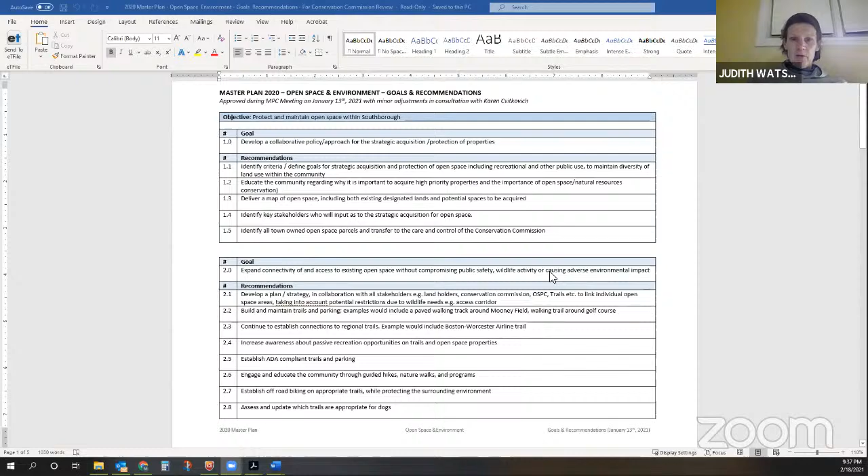I won't labor it too long, but we looked at the master plan goals and objectives for this - the open space and environment sections - way back last year, I think this spring last year. So in the final stages of reviewing and approving these goals and recommendations, we're actually writing the report now. We've decided as a committee that we will write the report ourselves, as opposed to spending lots and lots of money, which we don't have anyway, to get a consultant to write it.

I just wanted to quickly update everyone here, because we've done quite a lot of wordsmithing, really trying to tighten up the language in these recommendations. Also, some of it was a little bit - I guess there was some duplication in there. So the first goal here is around strategic acquisition and protection of properties, which we've not changed too much.

The one I think that's in here that specifically refers to the Conservation Commission is 1.5, which talks about town-owned property, town-owned open space parcels transferring to the care and control of the Conservation Commission, which I think we've talked about here. And this is a 5 to 10 year plan, so it's not that we have to do it all this year, but so that one is out there.

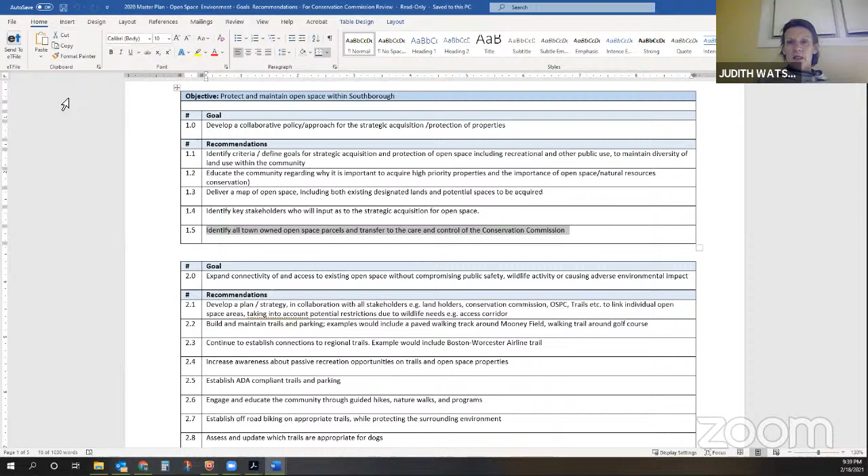We then, goal 2 is around connectivity and access to open space, and that's really making the spaces available to everyone, and doing more work on education and updating trails. So this is really about trail management. Stop me as I go through if there's anything you want to talk about.

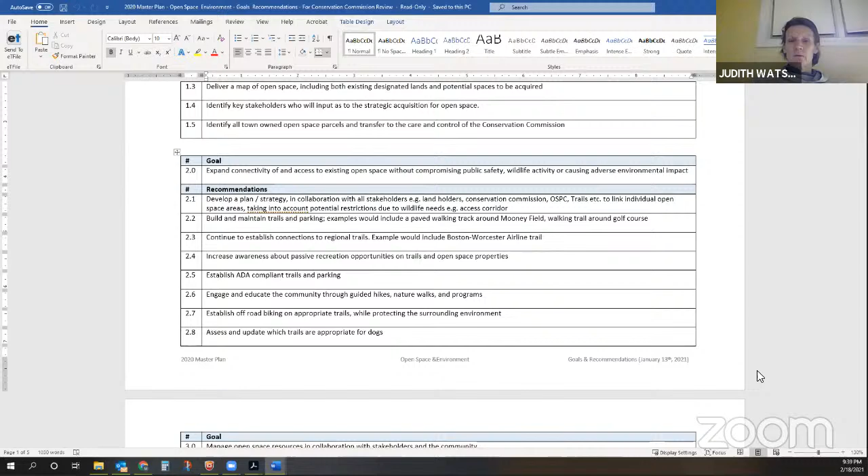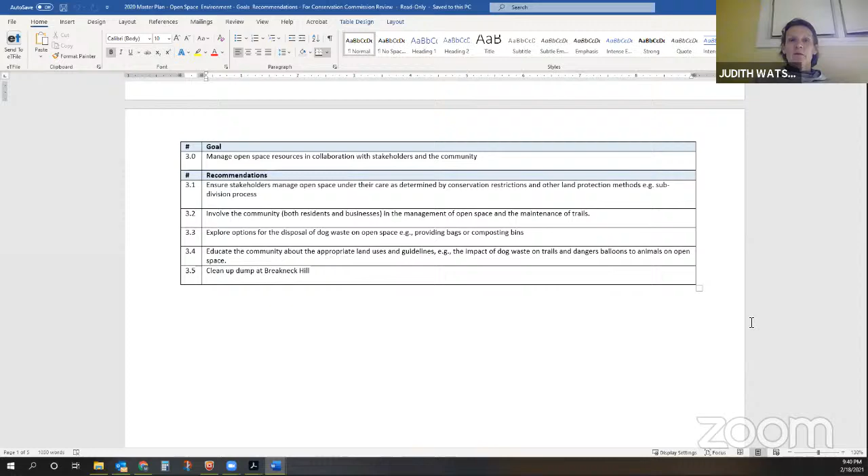So number 3 is really about managing open space. You'll notice 3.5, which I know we're not talking about at this meeting, but this actually came up, this was raised by a number of people in our survey process, so that is obviously on there. So that is the 3 goals on open space.

If you then go to the next one, this is about environment, and environment is a much bigger section in this year's master plan than it was in 2008. In 2008, I think there was a little paragraph. So the view was that it's a big opportunity area for us here.

And this is the one I particularly wanted to make sure everyone was aware of. This is about stormwater, and we had previously included a goal around making sure that the stormwater bylaws reflected federal, state regulations, but also the projected impact of climate change. And this is where we talked about taking the opportunity to review our bylaws and upgrade them. So things like NOAA 14, I think it is, we can include in that.

So that was really 1.1 to 1.4, that kind of formalizing that process so we could do that. And then 1.5 to 1.8 are actually recommendations, again, linked to water, stormwater runoff, which came directly out of the MVP summary of findings. So Melissa and I worked with Mimi Luttrell to map the MVP summary of findings against the master plan.

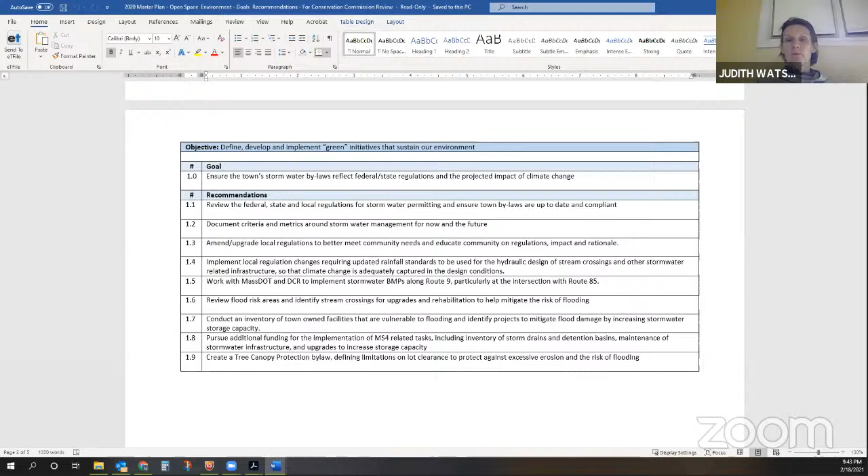And I think everything I've heard at the Conservation Commission about concerns over clearing trees, not only its impact on stormwater, but just on the aesthetics and the natural habitat, this would be a good one for us to do. And then the next 2 here are around recycling. Question on that set?

I'm sorry? Can I ask a question on that last set? If you could scroll up. Can you hear me? Yeah.

So when we talk about the bylaws, are you only talking about stormwater, or would we also consider under, I guess, 1.1, some of the things that we've touched on in previous meetings, like do we want to consider a 25-foot no touch or something like this? Would that be under 1.1, or is there any discussion of looking at the wetland bylaw?

We could add that in. That was actually in the MVP. We didn't put it in here, but we can add something in around looking at both wetland protection and stormwater for sure.

My other question about whether it's in scope already: we had a couple discussions in previous meetings about road snow storage and dumping, and the fact that it didn't seem to be covered by any local bylaws, or at least it wasn't clear. Should there be some kind of permitting or requirements around storage of large amounts of plow material, just because of the nature of the salt and runoff that comes from that? Would that be considered under 1.1 here, or was that discussed?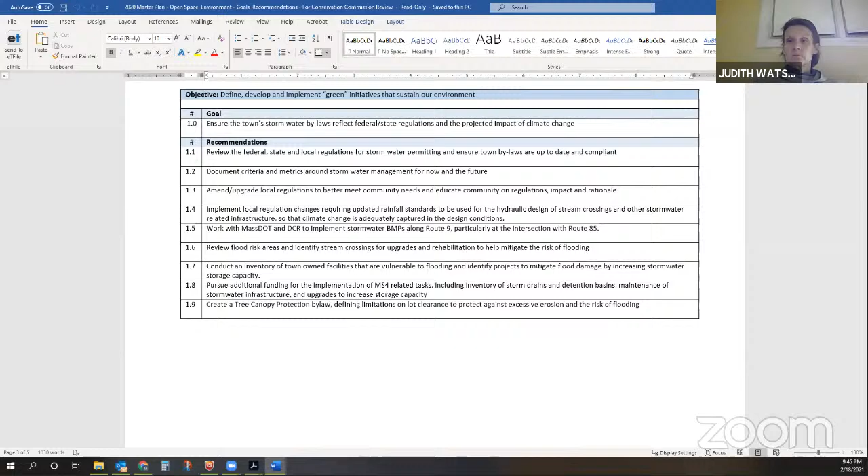Thanks, Jeff. That's great. Sure. Yeah, I mean, assuming other people agree, I'm just floating those things we've talked about. No, I think it's great. I think it's great.

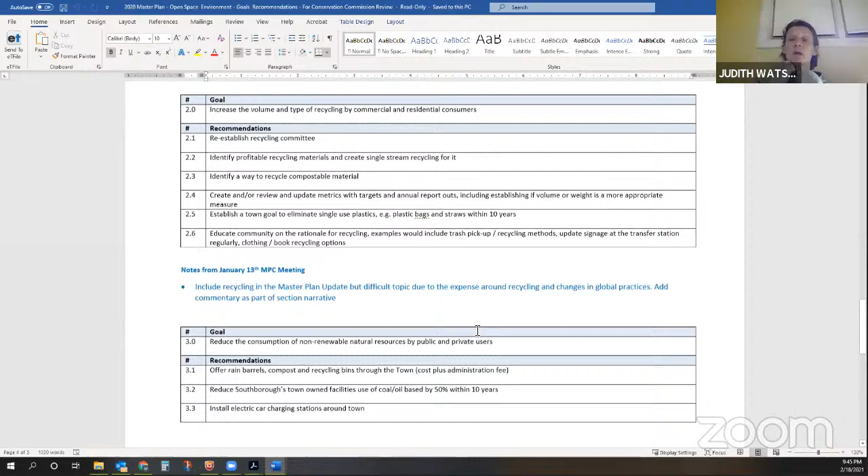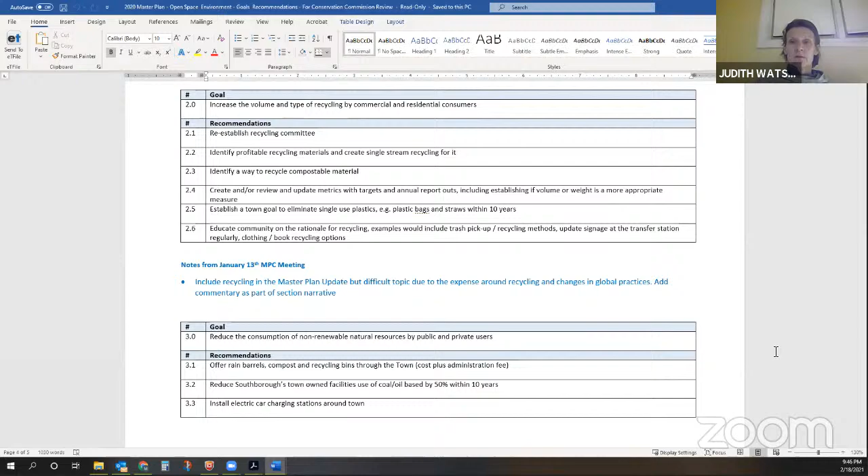So 2 is around recycling, 3 is around non-renewable natural resources. Again, as I said, much more emphasis on those in 2020. They were teeny weeny bits in 2008. And then the last 2 are around native plants and invasives. At one point there was about 12 different recommendations here.

So I kind of went back and did a bit of a scalpel job because it was very detailed, in a way that didn't really add value. So I think we've got some robust kind of umbrella recommendations here. And one of the things that we keep talking about in the master plan, that I bang the drum about every other meeting, is that they have to be measurable.

So we haven't gone on to implementation plans and metrics yet, and we haven't even got to the point of saying who's going to be responsible for making these things happen. But I think there's one there - the last 2, 5.2, 5.3, we talked about last year. I think one of those, the native planting schemes, was something we asked Freddie and the open space group to come back to us with a proposal on. So this kind of puts it into the formal plan, so hopefully we'll be able to get those to come to life too.

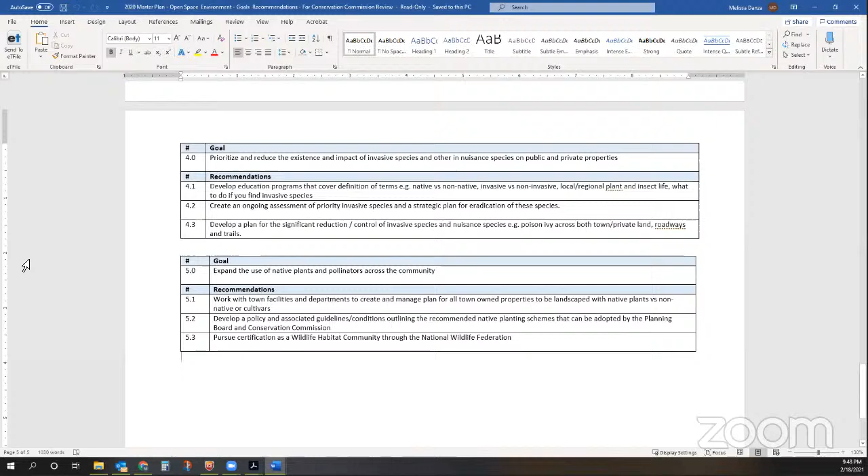Judith, there's a humorous point on 4.1. You say what to do if you find invasive species. Right? I think we should make an exception for the feral primates. Okay, dead silent. Point noted, yes. Go ahead. Nobody's even dare laugh at that, did you? Everyone's laughing hysterically, it's just on mute, so you can't tell.

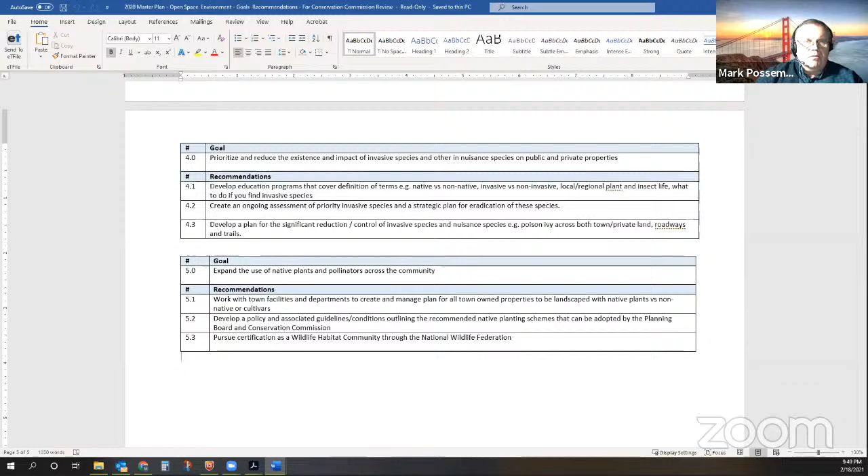So Judith, I like the fact that you took a scalpel to 4.0 and 5.0 and trimmed it down so we weren't solving world hunger or boiling the ocean. Yes, and that's one of the things I kind of took on across the whole master plan.

Yeah, there used to be just a big long list of things. And Sam is still on, so he will attest to the fact that no area of the plan has not been gently curtailed, scalpeled.

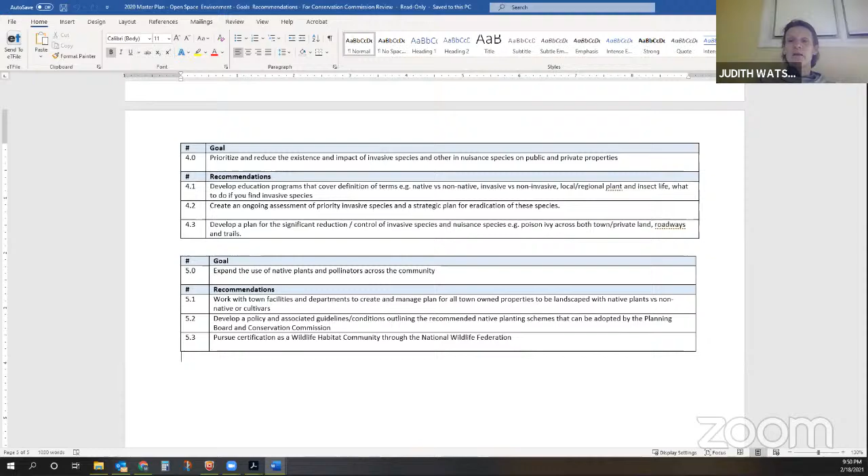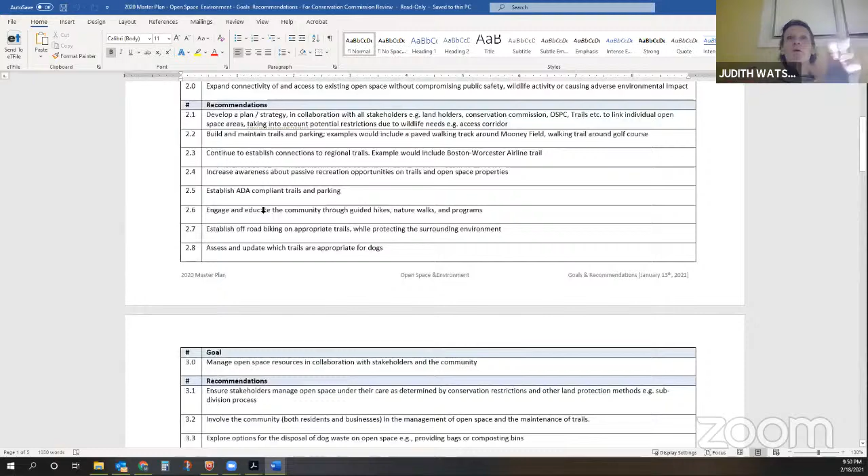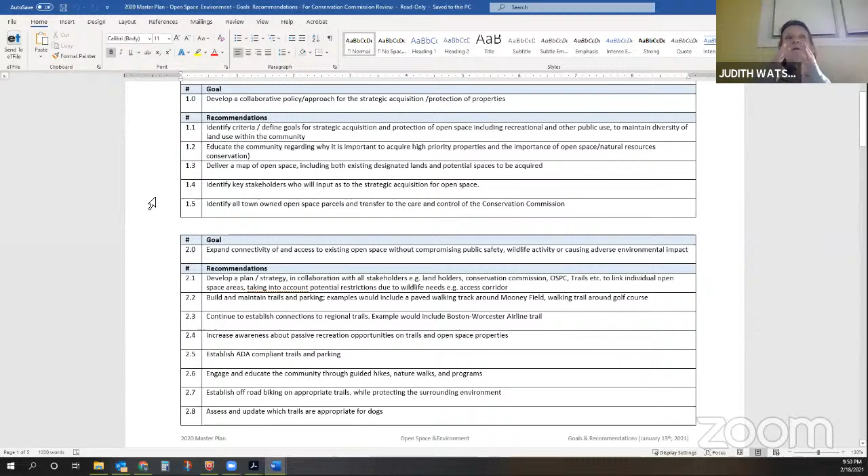But I think we met last week, and the general view of the committee is that this is a robust plan, and I think people feel it's definitely achievable. One thing, just as a bit of background, and I know it's getting late so I won't drone on, but one of the big things we've done this year is made sure we don't have lots of very generic recommendations around things like zoning, because so many of the recommendations in the 2008 plan were all about changing zoning, and it just never managed to get through either the planning board or the town meeting.

So what we've done on the zoning side is said: if there's a specific project that needs changes to zoning, like the downtown initiative, then we'll include recommendations around zoning in the context of that project, as opposed to saying, here's some, let's change everything.

Okay, got it. Okay, thank you. Very good. Yeah. Thank you. Thank you. Okay.

Let's see, is Matt still on? Anything from him in terms of updates or anything? Or did he bail? Oh, there he is. No, I'm here. Nothing new or exciting. Just waiting for the snow to melt, thanks.

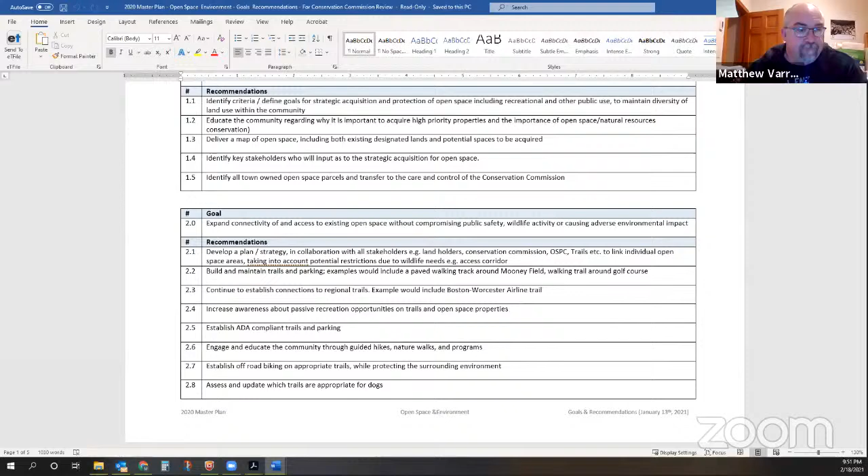Waiting for the snow to melt. Okay.

Just a heads up that St. Mark's is going to be starting their residential life building beginning in March. They're going to start putting up the fencing and erosion controls, and then start building that nice big building. So get ready for that. I think that's the main project on the horizon that will be starting soon.

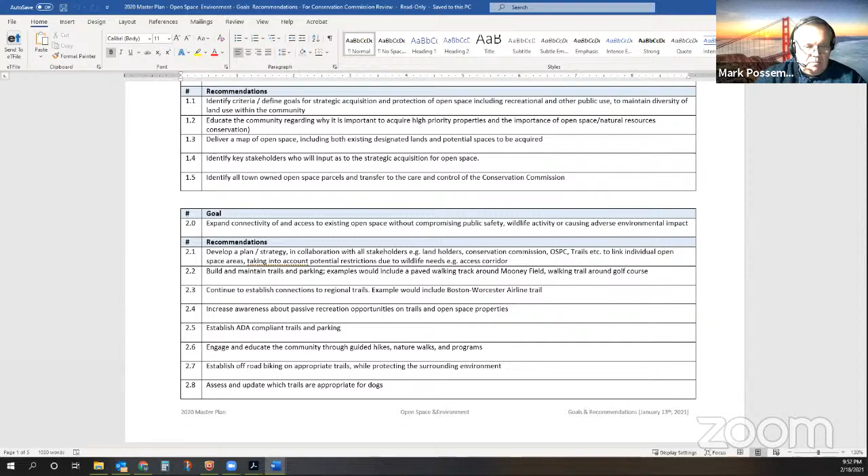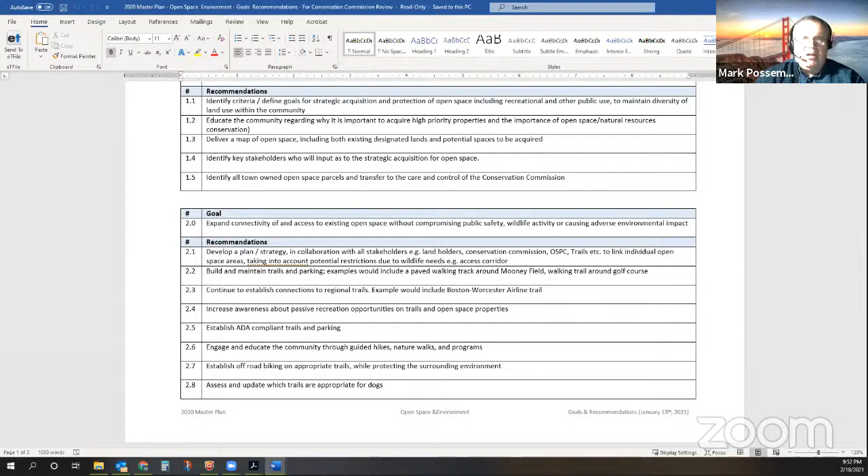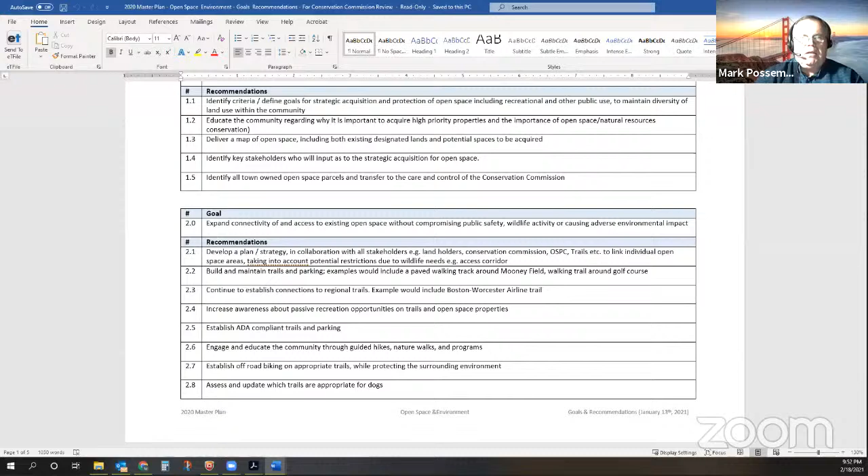Other business as may arise now needs to be limited to things like what Melissa just brought up, general housekeeping items. It can't really have any specific item that may be of interest to the public. That needs to all be put on the agenda and published in a formal way, so we get that readout from the town clerk and board of selectmen, because the way we're operating, people look at minutes and see what's coming up. They can join the public hearing and participate in something that has a level of public interest and concern. So it's a bit of an operational change from what we've typically done historically.

All right, if there's nothing else, I'm gonna go have dinner. Me too. Mind if we circle back to the minutes from January 20? Oh, very good. Yes, thank you for keeping us honest. Thank you, Katie. Anytime. Yes, true MVP. Yes, it's the minutes from January 28th.

We need to circle back because Russ had some comments. And the mute's off, so line 121... 128. Yes, page one, or line 121. Got it.

It's a discussion of the septic system and the overdig. I wanted to bring this up just so everybody understands exactly what's going on. I know Ben gets it, but there's still work being done outside of whatever that measurement is, because this is a 5-foot overdig sideways, so when they show us the plan and it says 52 feet away, in reality it's 47 feet away. It's a math game with everybody, and they all get it, but I just wanted everybody to understand why I brought it up the other day, because I wanted to know what they were really doing. So that was a sideways measurement. I think it should probably read: noted that there is a 5-foot sideway overdig on most systems.